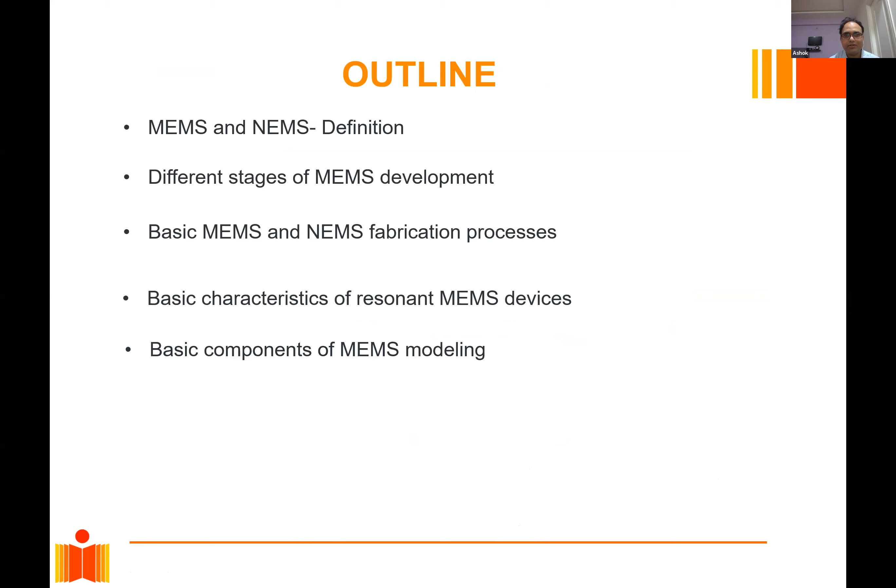Then how do we characterize these MEMS structures? What are the different components of MEMS modeling? And why is there a need for multi-physics and coupled field modeling in these particular devices? Then I will demonstrate some of these modelings through some test structures. So as you all know, MEMS stands for micro electromechanical system and NEMS stands for nano electromechanical system.

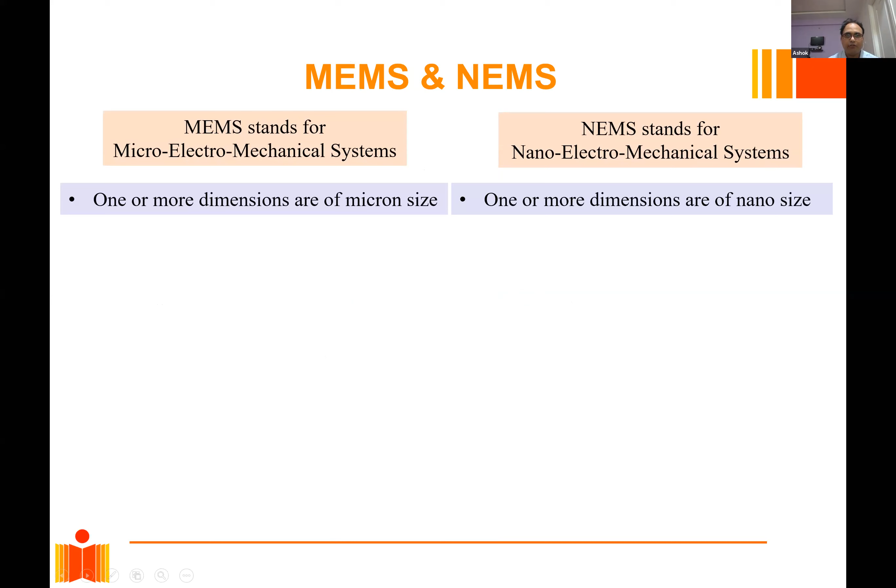And the definition is because one of its features is of micron or nano size. And in these structures, although there are different types of mechanisms to actuate them, if you're using electro, then we call it a micro or nano electro. And when you actuate these structures, the mechanical component of this device gets into motion, and that's why we combine it as a microelectromechanical system, which is fabricated on a single wafer.

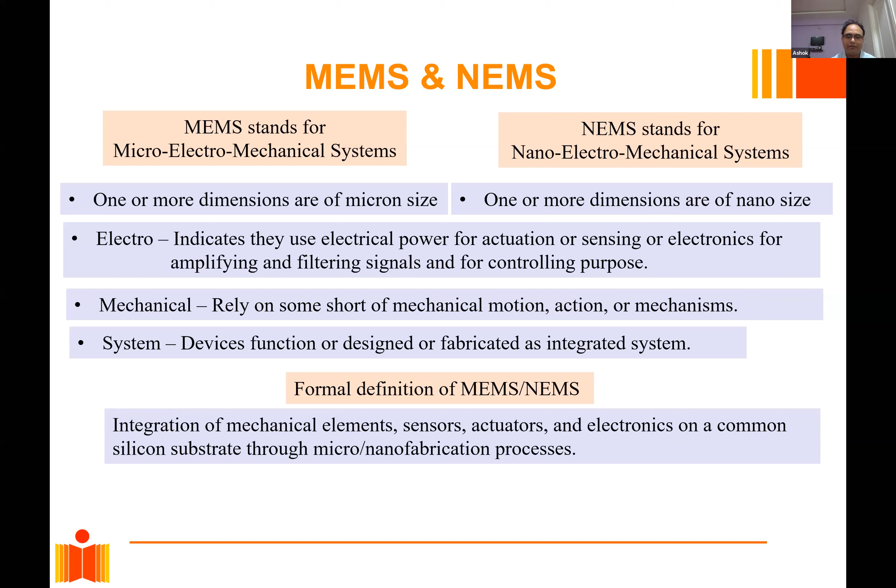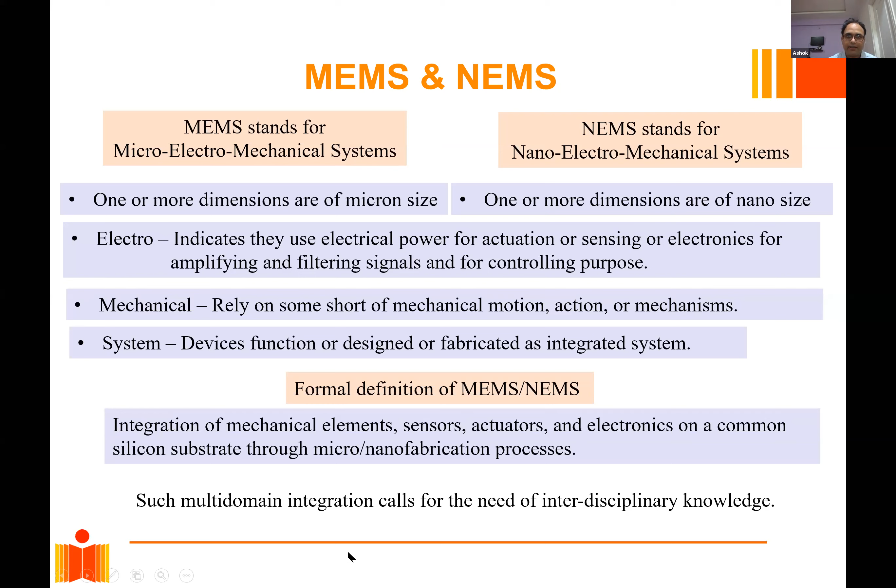So in a formal definition, we define it as integration of mechanical elements, sensors, actuators, and electronics on a common silicon substrate through micro or nano fabrication processes. And this calls for multi-domain analysis in dealing with the design of these particular devices.

So what are MEMS? Can we use them as sensors or actuators? Yes, MEMS can be used as sensors. And what is a sensor? Sensors are developed to measure physical quantities, and actuators are developed to induce the effect. For example, there are actuators which will actuate the motion, and sensors will sense some of the changes

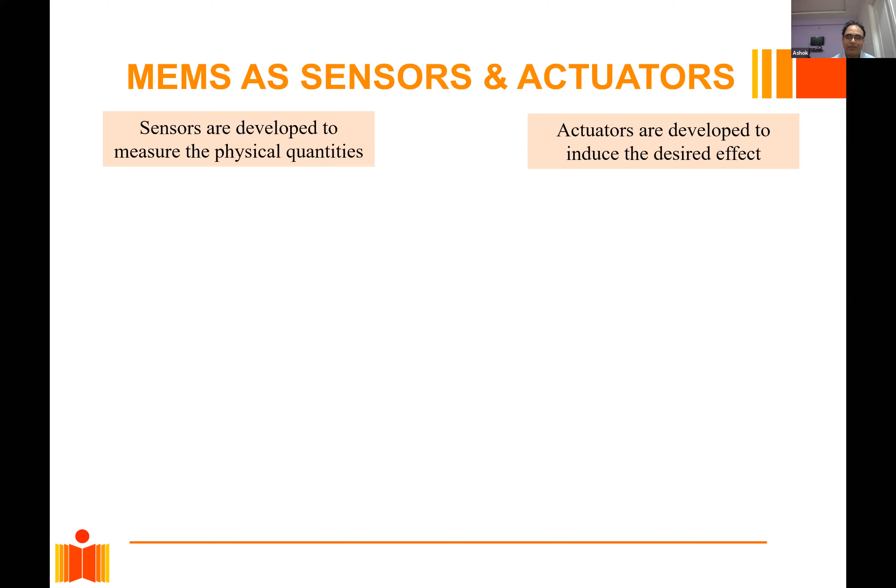which are happening outside. Okay, so when there is transfer of energy from mechanical to electrical, we call it a sensor. And when there is a transfer of energy from electrical to mechanical, we call it an actuator. So that is one way of defining the difference between sensors and actuators. And this is how you can make use of MEMS for both things.

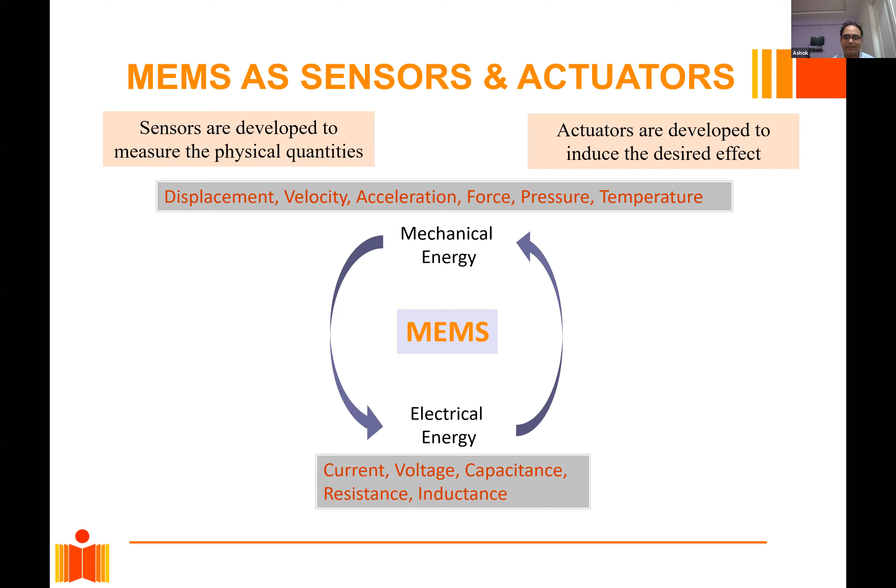So what are those mechanical energies? In what form may they exist? They may exist in the form of displacement, velocity, acceleration, force, pressure, and temperature. So these are the mechanical parameters that you can have. And change in any of these quantities will bring change in terms of the measuring quantity, which are current, voltage, capacitance, resistance, inductance, etc.

What are the examples? Examples may be inertial sensors, accelerometers, gyroscopes, pressure sensors, gas mass sensors, temperature, humidity sensors, force sensors. Similarly, we have actuators, for example, micromirrors. Projectors which we use for presentations consist of many micromirrors. And then we talk about RF switches, micro relays, thermal bimorphs, comb drives. These are all actuators.

And similarly, there is a characterization facility: electrical, mechanical, material characterization. So you require all these to first fabricate it and then do the measurement to see whether your design really works properly or not.

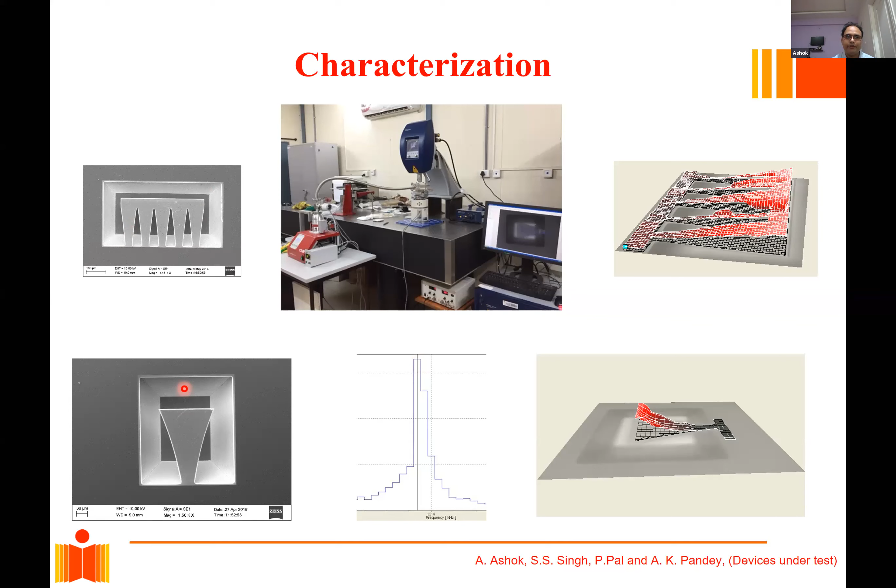So when we look at some of the commercial MEMS products, the first thing that comes into our mind is MEMS accelerometers, right? Because you will see that in almost all the cars we are using airbags, and the airbag uses these MEMS accelerometers, mainly by Analog Devices. And this was the first device that came into the market initially, and after that there were many devices that started coming with the progress and standardization of the fabrication steps.

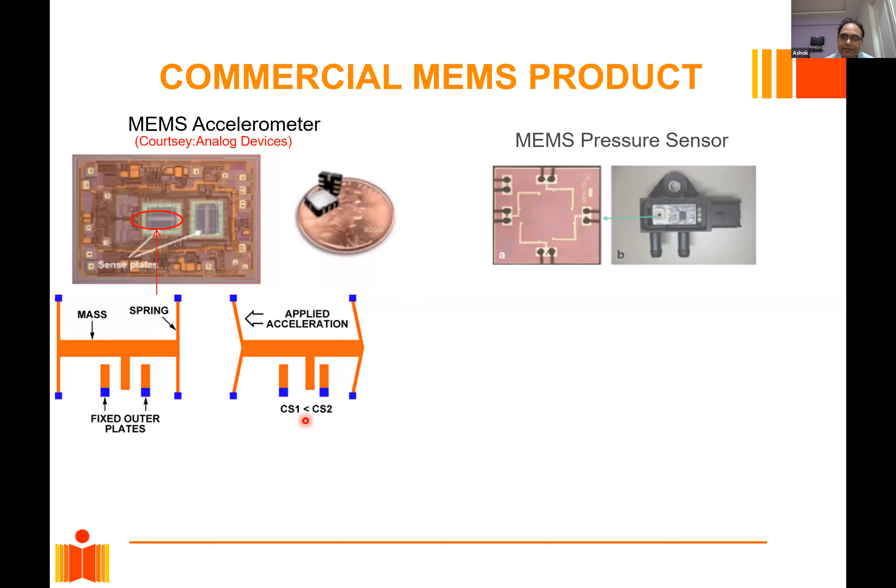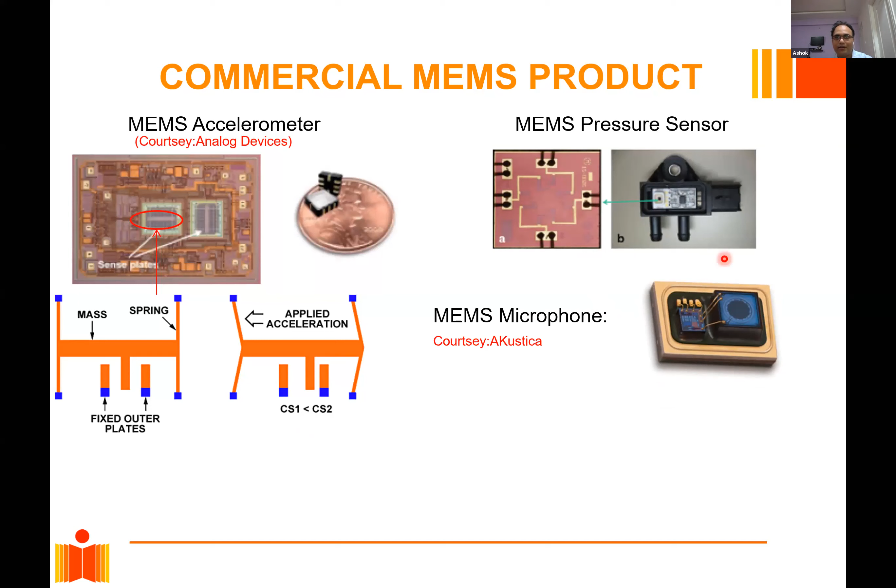And similarly, you can see there are many MEMS pressure sensors. And again, I would like to bring your focus over here: this is the only region where your MEMS device is located. The rest of them are all electronic signal conditioning circuits. And then the MEMS microphone is another very widely used example. And MEMS gyroscopes are used even more, starting from toys to our phones to different cameras in laptops. So you will see that MEMS gyroscopes are really very, very important.

Now, what are the different types of MEMS gyroscopes, and why? You will see that toys, cameras, and all may require some medium-range gyroscopes. Meaning they may be okay if they are able to measure angular motion with a certain error. But when you are trying to measure precision angular motion or rotation, you require different types of gyroscopes.

So here you will see this is your conventional MEMS gyroscope, which has combs and proof masses. And there are two proof masses here. You can see this is one, this is another. And when they move in plane, they may move in phase, and they may also move out of phase. One is called the drive direction, another one is called the sense direction. And when there is a rotation provided along this axis, you will see that when it moves up, that will give you a sense output. Okay, so this is one type of gyroscope.

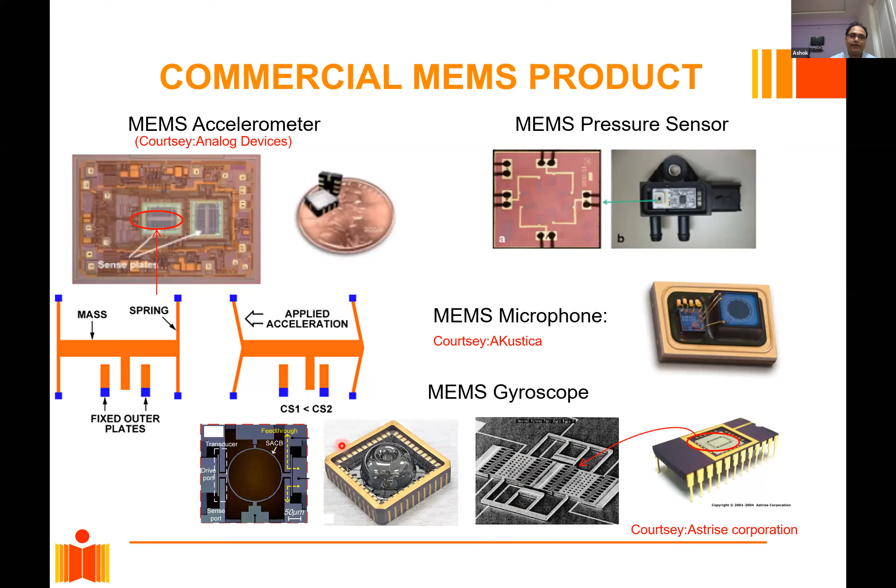And other kinds are shell gyroscopes and disk gyroscopes, which people are exploring to improve the characteristics of these gyroscopes. Now, when you look at one of these devices which are completely integrated, you will see that, as I said, nowadays people are trying to put a lot of these sensors on a single platform. So here you can see this is the accelerometer, this is the gyroscope, magnetometer, barometer, your connectors, and all of them are on a single platform, right? And this is the advantage. That's why we have been investing a lot of time for a couple of decades just to get sensitive sensors with reduced size, so that we can put many of them on a single platform.

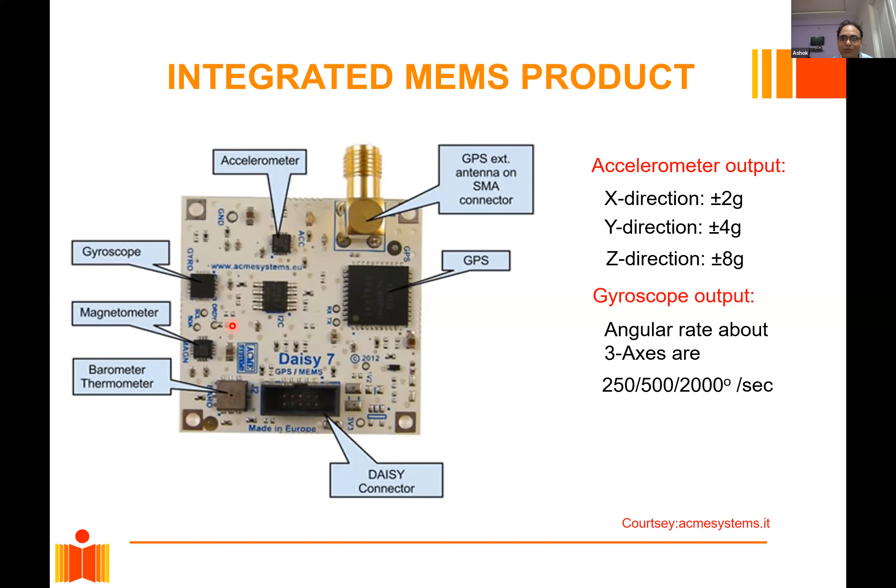So these are the specifications that I don't need to really go into. Now, if you try to see the biggest application, of course the application is there in aerospace, in many of them, but the biggest application that we can find is in vehicles, which is accepted by everybody. So in this case, you can have application in terms of airbags, which I told you use accelerometers.

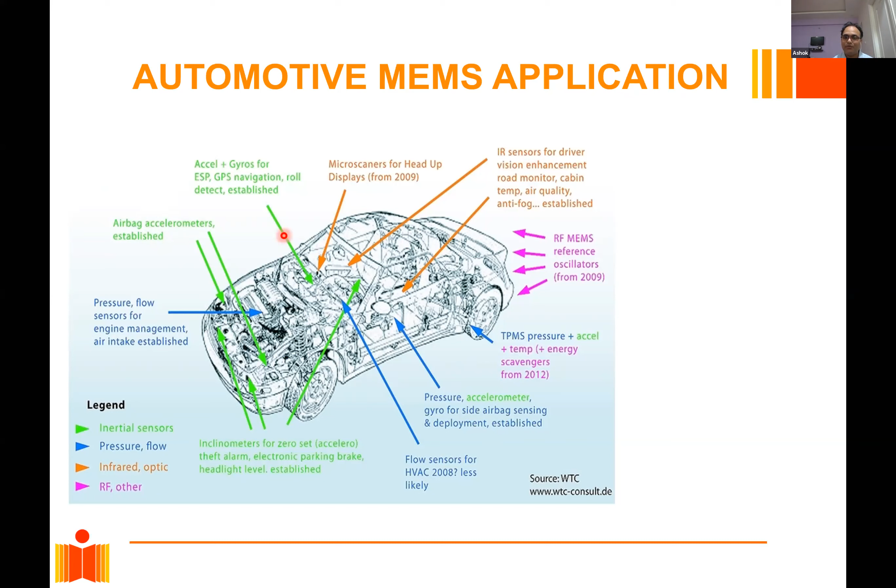You can have pressure flow sensors, inertial sensors, micro scanners, IR sensors, RF switches, temperature and pressure sensors in the tire. So there are many of them which can be used, and BMW 740i has already used 70 such MEMS sensors in their cars, starting from anti-locking braking, active suspension, appliance, navigation, vibration, fuel sensors, noise reduction. So these are some of the applications that you see.

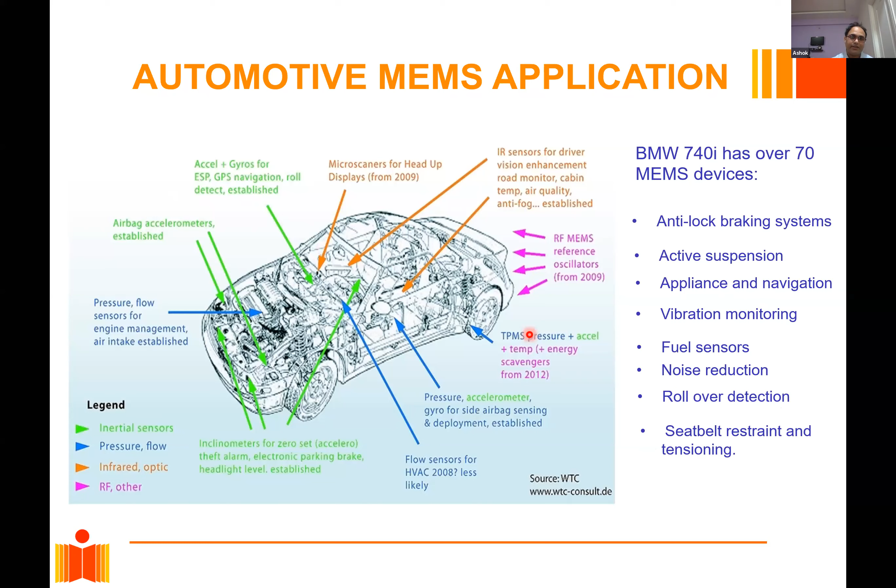Now going a little bit more inside these applications, you will see that in automobiles you can have sensors associated with dealing with the harsh environment, then steering, then safety. Most of these are divided into 4 different parts. One is safety and convenience, so you have to find sensors associated with safety and convenience. Then the sensors required for controlling the powertrain of your automobile, then body electronics, and also you will have to improve the sensor design related with driver information.

Sometimes you will see that most accidents happen when the driver falls asleep, or he is unconscious in some cases. So there should be some kind of alarm with the help of these sensors which can prevent accidents of that nature. So this is how people have started classifying and trying to figure out which kind of sensors can be used for improving the different mechanisms under these classifications.

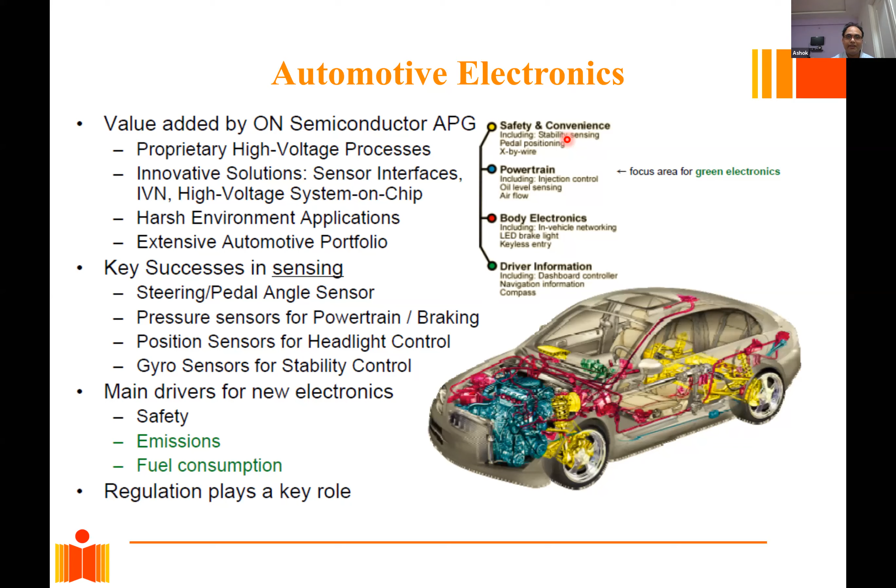And if you see, a typical electronics unit is the unit which will handle all the sensors in, let us say, your automobile. There are circuits which deal with different sensors related with your drivers, then analog circuits. So it has to really work so much, it has to process the signal so fast. Now what is the point? We are trying to increase the number of sensors, but we are using the same kind of electronic circuit. So is there a way we can improve the processing of these electronic circuits also?

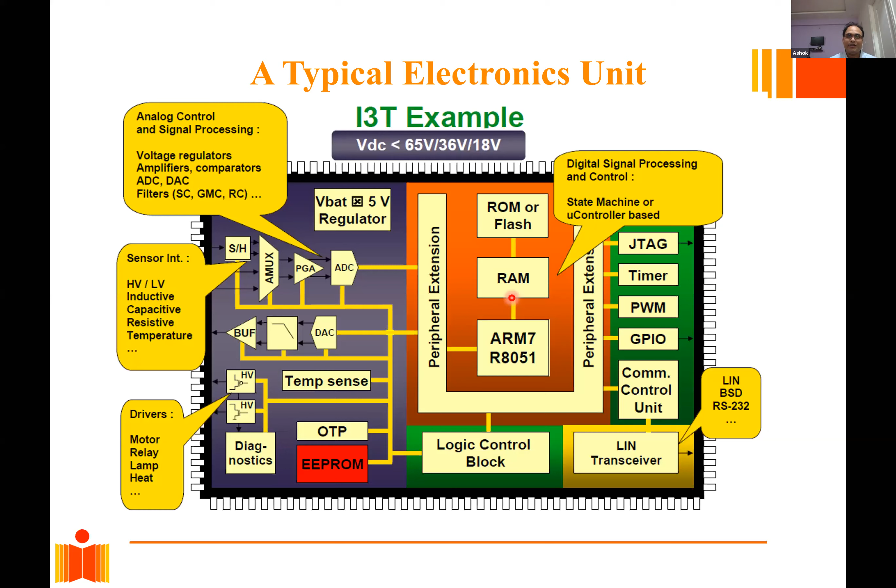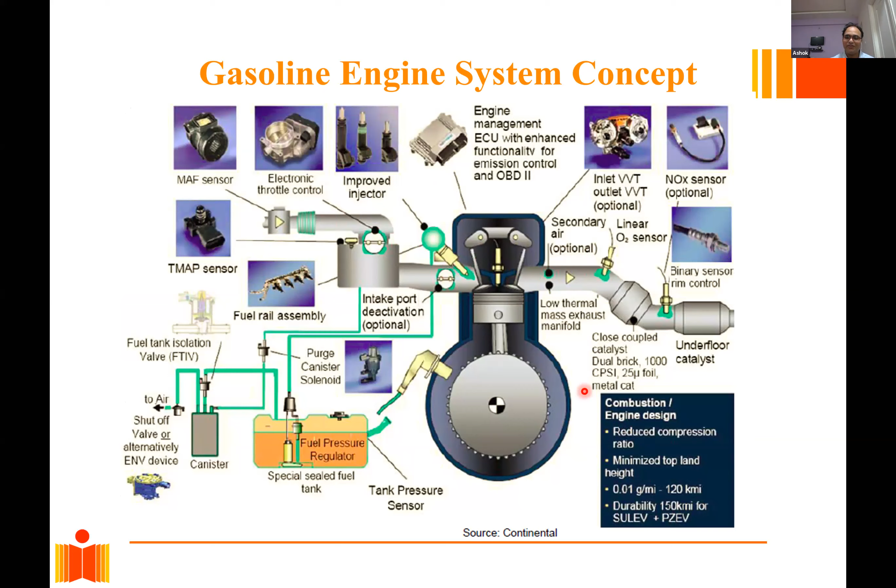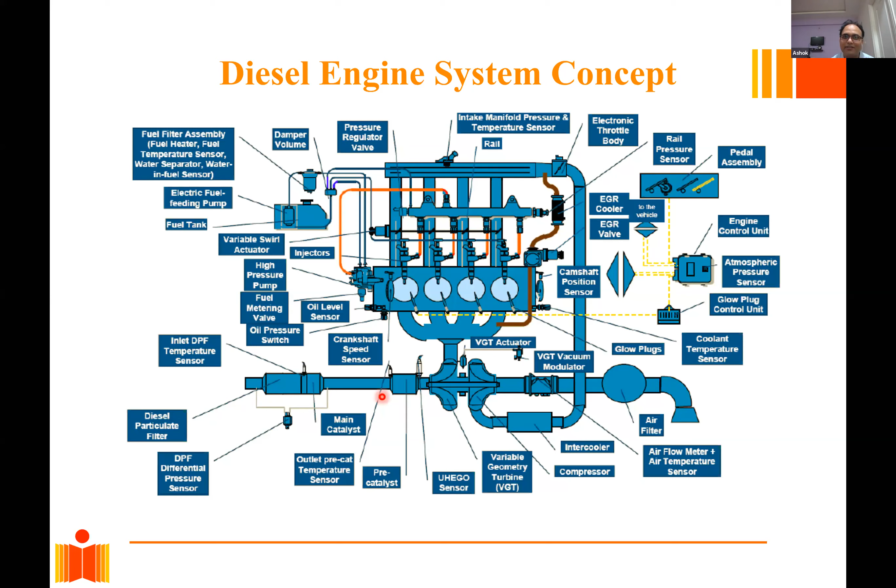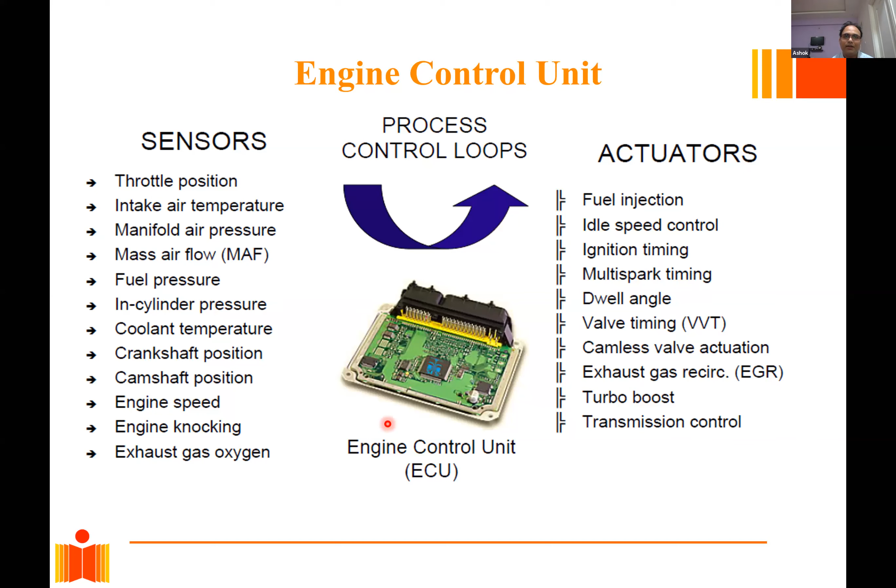So the question is, for example, for the engine control unit, the electronics which controls this engine, sensors can be throttle positioning, intake air, manifold, mass, fuel, in-cylinder, and all that. Similarly, actuators can be associated with all these activities. This response circuit needs to really control, and if there is a time delay related with processing the signals of the sensors or actuators, there will always be some kind of error, some kind of performance loss. So what is required? These are the things with the conventional automobile.

But since we are talking about smart cars, autonomous cars, it means you have to again increase the number of sensors, right? When you talk about smart cars or autonomous cars, you need to really talk about many things around it. Now, how are you going to measure it? You're going to use a camera, a laser, other different types of sensors, and it has to be processed so fast, because if you are driving at a high speed, everything needs to be in that order.

So here the question is, it's not about sensor design. Here the question is also about the processing of those signals which are coming from different sensors, and it should decide accurately what needs to be done. Otherwise the whole concept of smart cars or autonomous cars will really fail. And that's why you see there are a lot of tests going on. Even if many companies have developed these autonomous cars, they are not really going to take them out on the road, because of these problems.

So here, for this you need to care about safety concerns, powertrains, body electronics, driver information. These are the things that I was talking about. So it means there are too many sensors and actuators, too many signals, video signals, optical signals, radar signals, and different sensors and actuators. So how to handle so much data at a fast rate? So either you should design low-powered and fast sensors and actuators, or you design different electronics based on the fast mechanism.

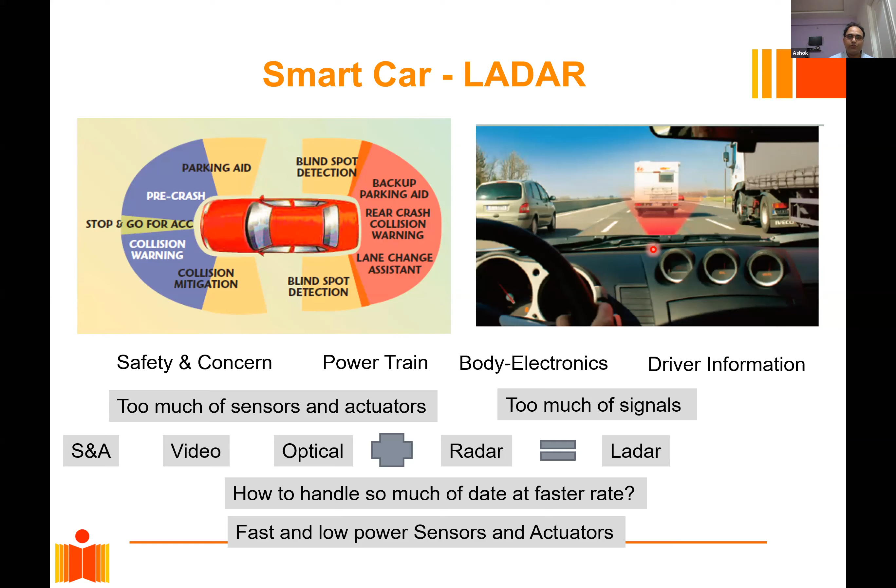Now coming to another very interesting application, called flexible electronics and MEMS integration. Until now we saw the size of MEMS structures is quite small, so they are fabricated on silicon wafers, right? But how to make use of them for a larger structure? So people started making use of flexible electronics. The examples are like, you can use it in smart clothing, lightweight military devices, integrated health monitors, bendable solar materials and all that.

So this is a field that cannot be made small, but must be big in order to interact with big things. For example, let us say you want condition and structural health monitoring of your car body while you are driving. How will you come to know that some portion is getting more stress and is about to break? If you have these kinds of sensors, you can simply put them on the surface of your car body, and they can tell you immediately many pieces of information, not just one.

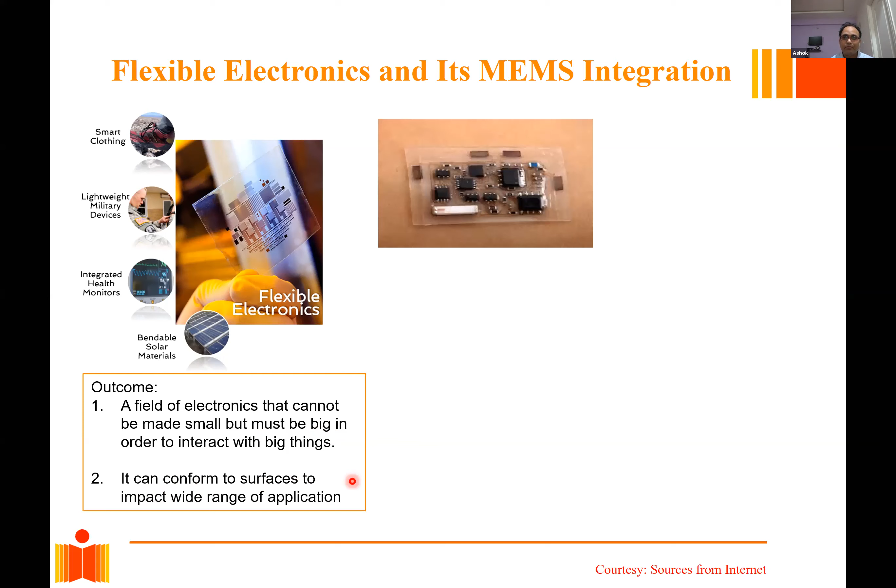So the advantage is that it can also conform to surfaces, so that it can impact a wide range of applications. And this is a typical device that you can see. The advantage is that you can bend it in whatever orders, and it can still work. There has been a lot of work done, and people have started using it.

Another application: you can monitor your health with these flexible electronic devices. You have sensors, temperature sensors, let us say. You can measure your blood pressure and all. Many things you can measure. Similarly, you can wear it as a watch. You can put it on your eye. You can have temperature monitoring. So these are some interesting applications. Here you can see these devices are very small, and they are on a flexible platform, so that you can use them properly.

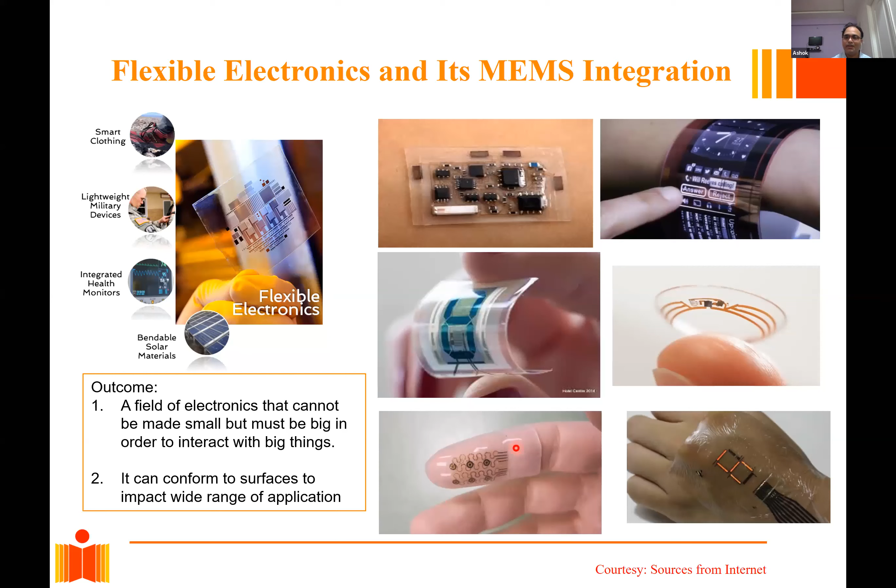Infrared, here we are talking about optical fiber related communication or the devices which fall under this region. And in terahertz, as I said, there had been moderate progress in sources and detectors, and functional devices such as this do not exist. So if the devices don't exist, you can't really make use of this particular region for the application.

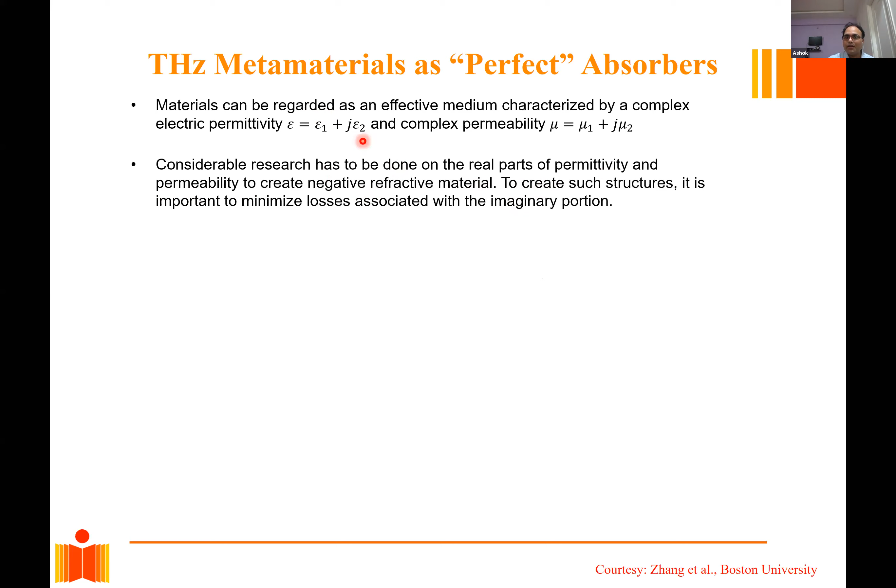But in metamaterials you can attain the desired permittivity and permeability. This is the advantage of working with these kinds of materials. So there has been a lot of research in understanding the real parts of permittivity or permeability. What needs to be done is we need to understand the imaginary component, which is associated with the losses. Sometimes losses are good, sometimes losses are bad. For many applications such as a perfect absorber, you will want to maximize the losses.

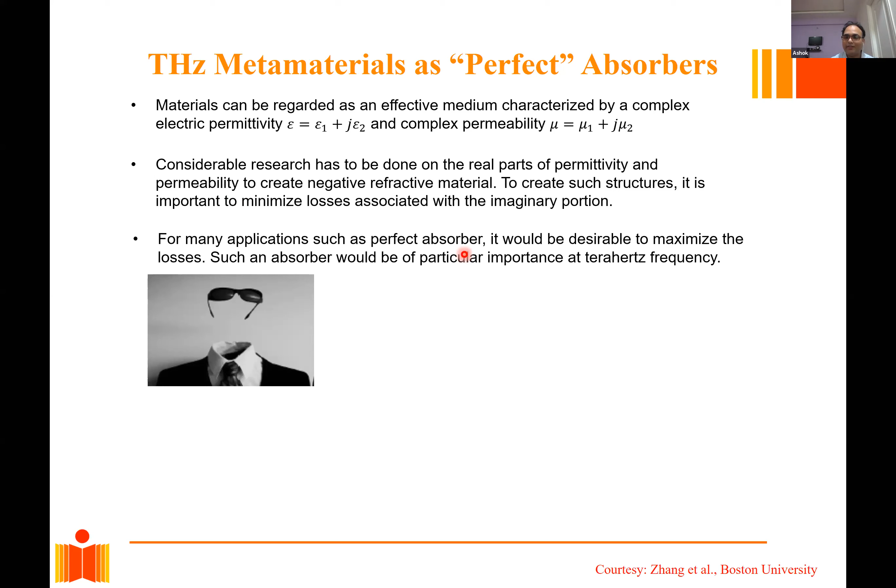So why do you need those kinds of material? You need them so that you can do yourself like this, right? You can put this material on your face and you will become Mr. India. And similarly, you can put it on your body and you will become bodiless. All the range of different metamaterial structures that you can have.

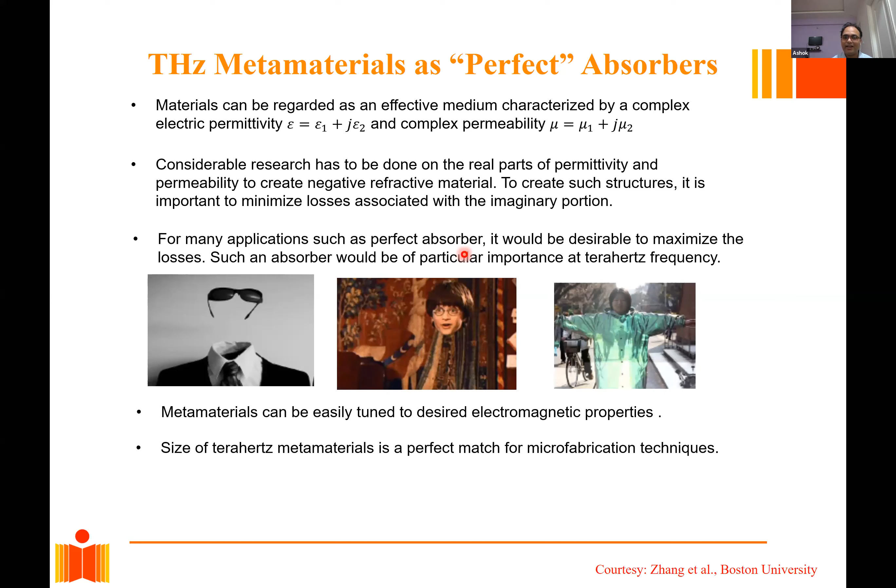So metamaterials can be easily tuned to desired electromagnetic properties. And as I said, the size of terahertz metamaterials is a perfect match for microfabrication techniques.

So here, if you just look at the metamaterials, they are sub-wavelength structures in array form. So the question is how it looks like. What do you mean by tuning the properties of these metamaterials? Is it one or is it an array? So basically metamaterials exist in array form.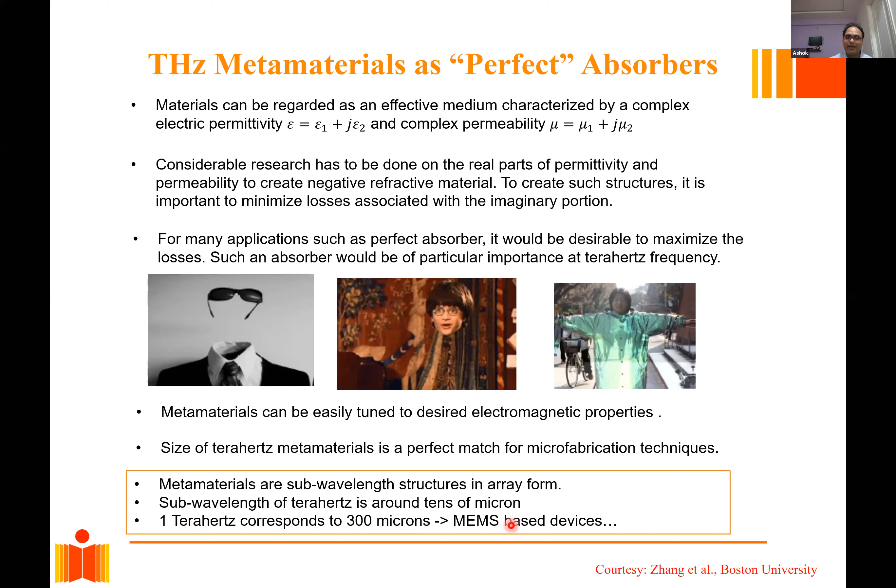Now the question is, what is the size of one of these materials? So that will decide the size of the wavelength. Okay, so 1 terahertz corresponds to 300 microns, and MEMS devices can be fabricated of that particular size. So one example of a terahertz metamaterial you can see like this. So this is one substructure, and when you use many of them, it becomes an array of these structures, and together it gives you the property of a single metamaterial.

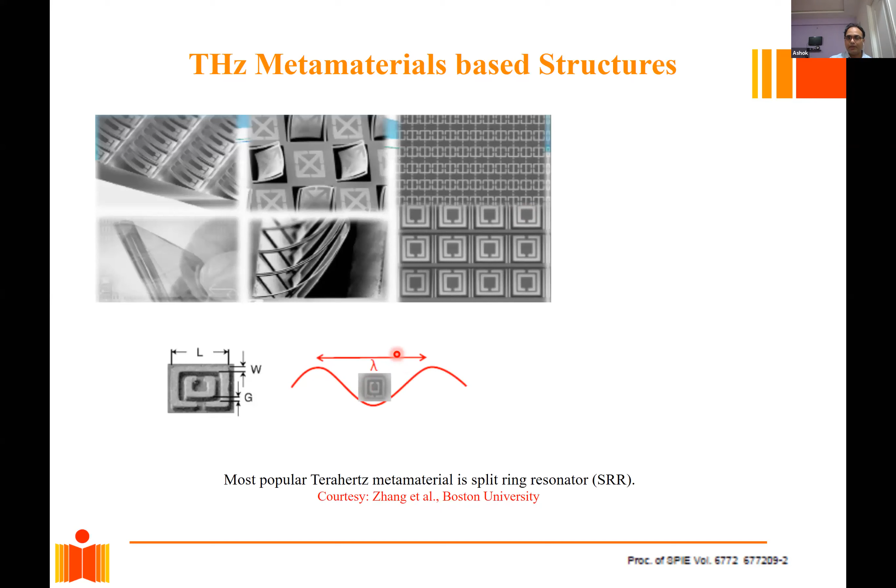Okay, and what it does, it helps. And what is the size of this? So here you can just see the size, right? The size will be within the wavelength of terahertz. So what it does, it can control the transmission and reflection of light by tuning the electric and magnetic properties of these structures. Okay, so this is the biggest advantage of such kind of metamaterials, MEMS devices.

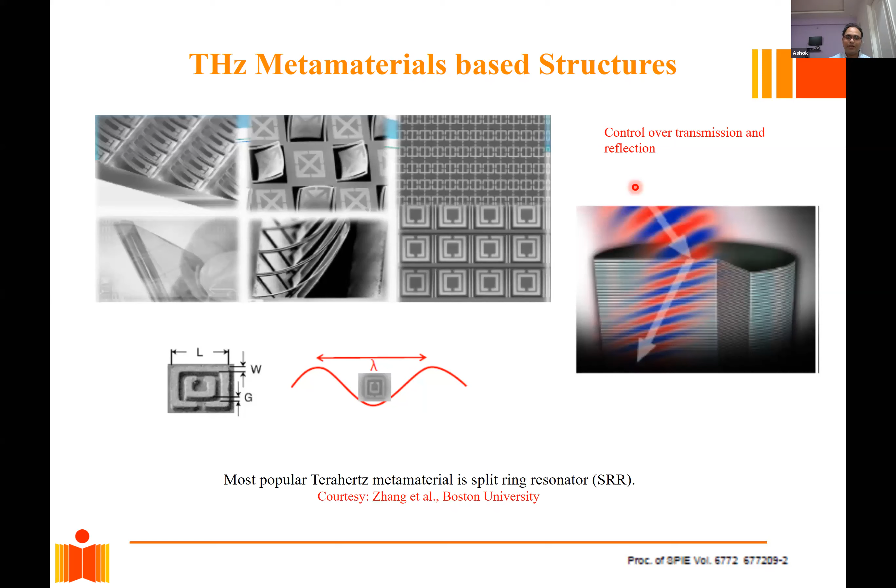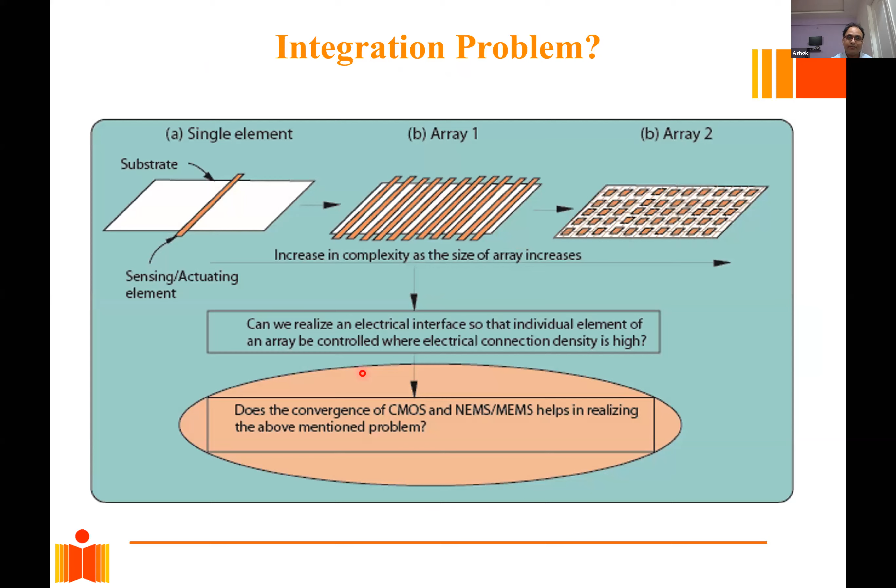Okay, now when you deal with arrays of these structures, this is another big example. So you have one single element, you have an array of elements, you can have many of them together. Now, because all these devices have to be bonded on a substrate, right? Or one die. So to interface these devices with electronics, there are different types of integration mechanisms.

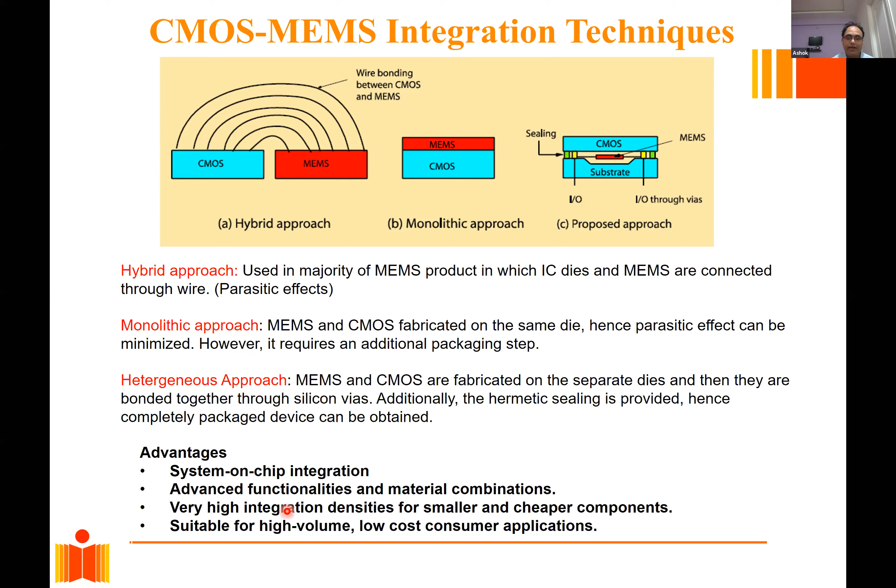Passive means static, okay? But here the device has to move, so it has to be hanging between the electronics and the substrate, right? Because the device is hanging on its substrate, when it is combined with the electronics, one can have some kind of via through it, and then you can seal it to create the required vacuum in the chamber. And vacuum is another important thing, because gases can induce damping of your structure, and when we deal with the performance of these devices, damping plays a major role. Okay, so hybrid type, monolithic type, heterogeneous type, and advantages like system on chip integration, and these are many of the advantages that you come across.

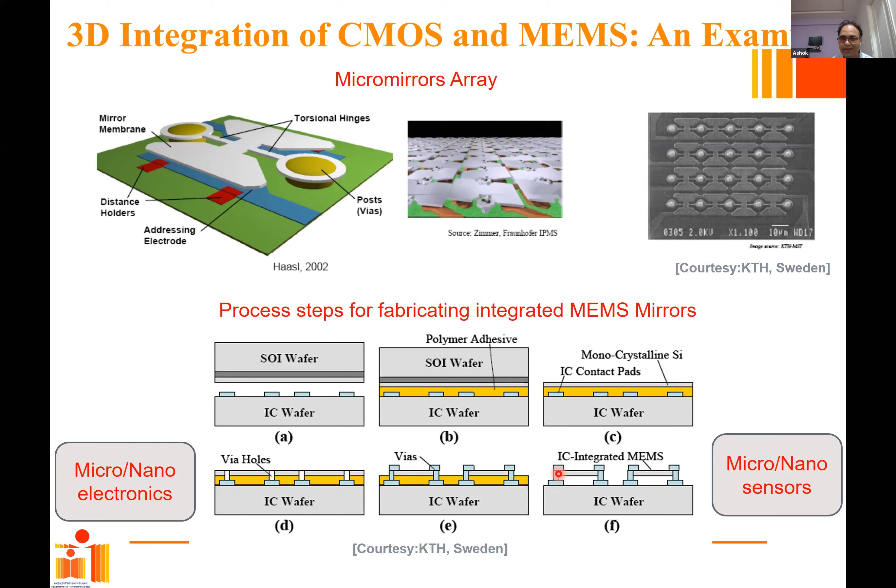So why are we going into these small details? Because we want to measure the lowest signals through these devices, and these lowest signals will come only from these viruses or noise and all that.

Okay, and another thing is you can go to the quantum regime only when you can suppress the noise. So when you go into these devices, it is really required that we should be able to design these kinds of sensitive electronics or transistors or sensors.

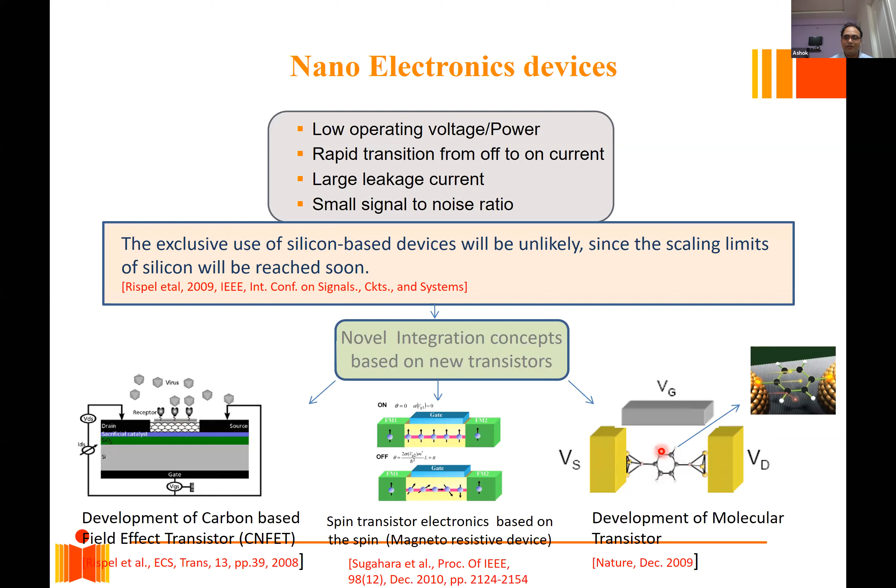Another such example is the biomolecules. That's why between these two, source and drain, this is called the molecular transistors. So you will see that there are a lot of devices. People are coming up with different types of transistors, MEMS-based transistors, and finally, these optomechanical cavity-based devices.

So, of course, to increase the signal rating, right? As I was talking about, when you have so many sensors, you need to also improve the logic gates, right? You have to improve your electrical processing. For that, unless you improve these electronic devices, you can't really do it. So that's why people started talking about the optomechanical cavity, with laser light.

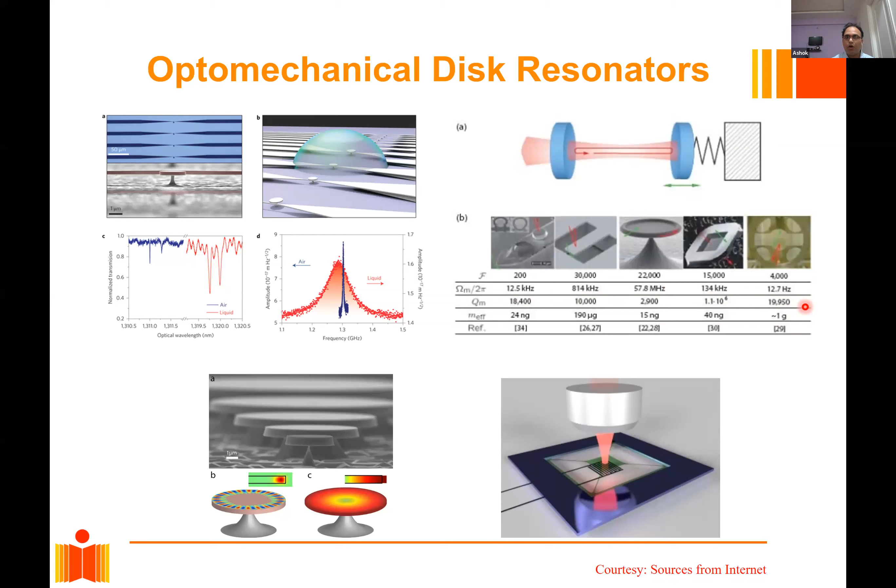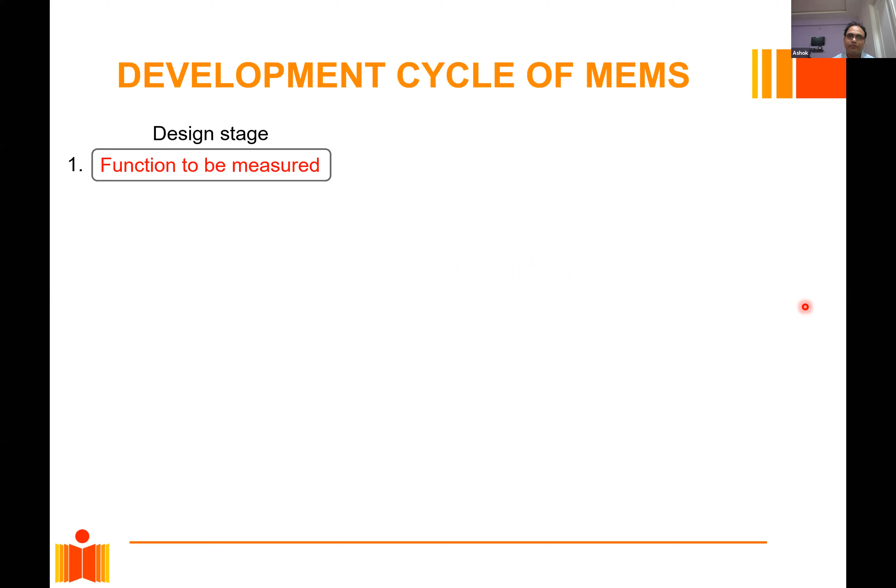So we discussed so many applications here, but how do we understand their design through the fundamentals? Until now we were just talking about the applications, different sensors. Now let us go into the more fundamental approach. When you have to develop a MEMS, what is really required? You first have to think about what function you want to measure, whether temperature sensors, pressure sensors, or inertial sensors, and related to that change, you will have to find out what dimensions need to be taken.

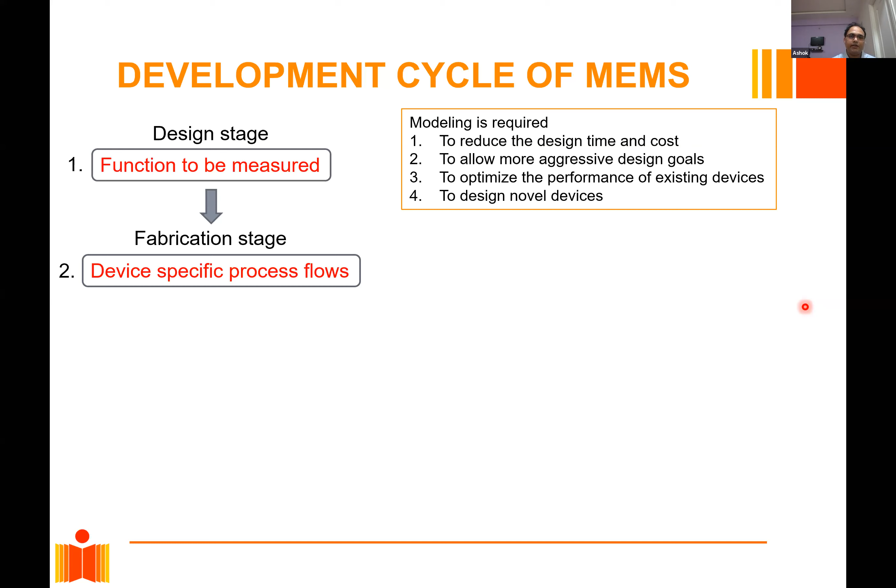After you are done with your design stage, you go into the fabrication stage. Depending on whether you are going for thick micro devices or thin micro devices, you choose your fabrication type. There are different types of fabrication. I have mentioned a few of them here.

Surface micromachining: if you want to make a thin and planar structure, you can use surface micromachining. Bulk micromachining can be used for somewhat thicker structures. In surface micromachining you have layer-by-layer deposition and etching, and in bulk you try to create a structure out of the given die by machining it.

And LIGA processes are used for developing even more thick structures like micro motors, right? Micro gears, which are quite thick. So you have to make use of some very specialized fabrication technique in that case.

After doing that, you have to do wafer level testing, of course, before going for the packaging. What it does, it ensures that your fabrication is standardized and the MEMS structures are released properly. But after the standardization is done, you don't really need to do this again and again. Usually it is not part of the commercialized cycle.

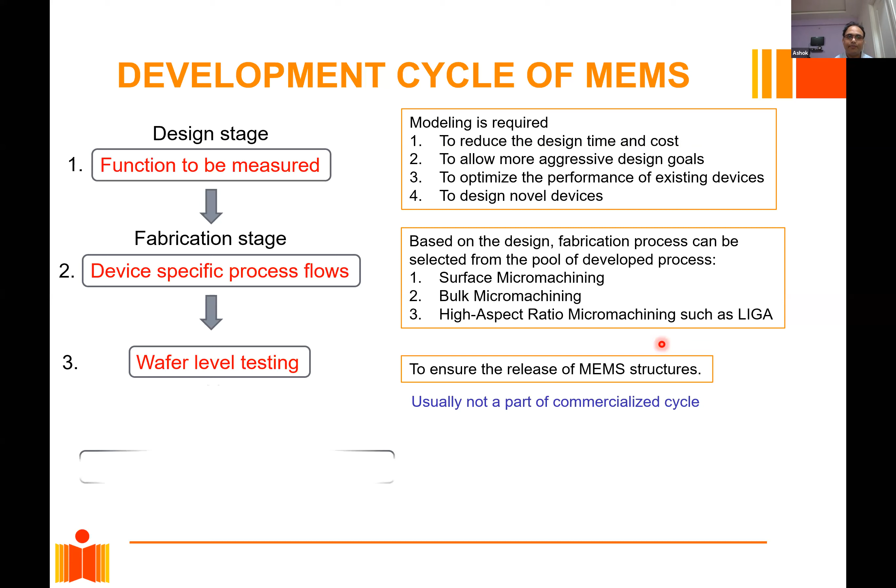Then you go for packaging, development of custom packaging. So for different devices, packaging has to be decided, because some of them will work at ambient pressure, some of them will work at vacuum, some of them will work at a very high temperature, low pressure and all that. So you really need to devise your packaging. This is another challenging part.

That's why we can't really make use of MEMS everywhere, because it fails. If it works for one application, it fails for another, because it may be compatible, its design may be reliable to that level, but the lack of reliable packaging makes the device fail. Okay, so this is another area where we need to really focus a lot. Then we do testing of some of the packaged devices to ensure that everything comes back.

And when we deal with CMOS MEMS integration, here we have the coupling of the fabrication and packaging, which go together. So this is another advantage why we also talk about CMOS and MEMS integration, and it has a very important role to play in the development of different types of packaged MEMS structures.

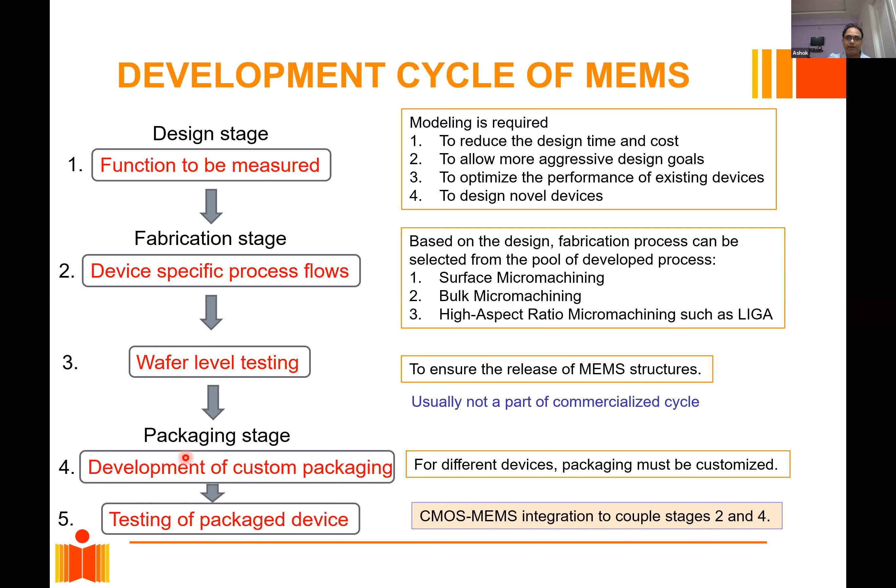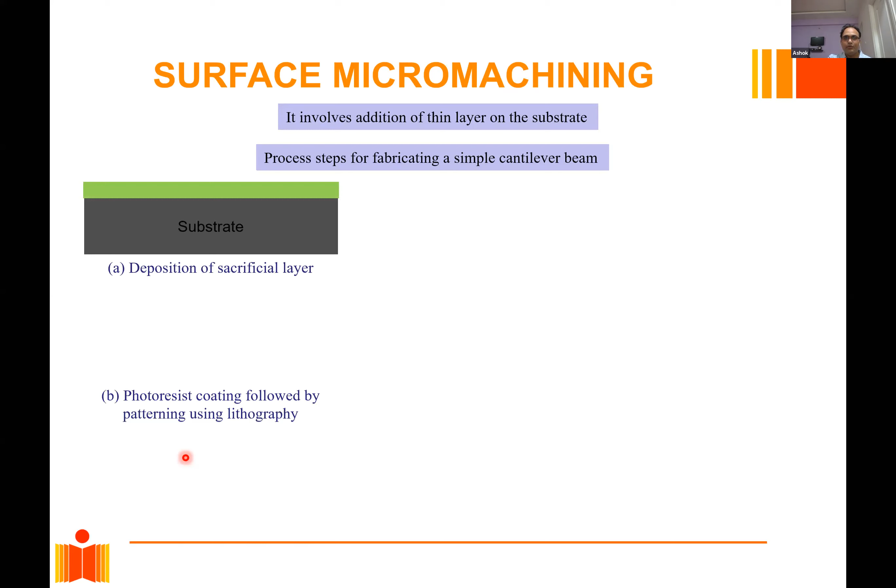All right, so just to give a very small overview of what is surface micromachining. It involves addition of thin layers on the substrate, and when you try to fabricate a simple structure, you start with a substrate, deposit some layer here, and then you do patterning, and after that you do etching. So here you can see your sacrificial layer is usually oxide or nitride, and then you do patterning. There are two different ways of doing patterning: either using e-beam lithography, or using photolithography. And after that you do etching.

And after this, you remove the photoresist that you have put, and then you put your metal. You do deposition of the metal through thermal evaporation, RF sputtering, electron beam deposition. There are different types of metal deposition instruments. And after that you remove this sacrificial layer. When you remove it, you can see that there will be a hanging microstructure, which is fixed to your substrate. And of course there will be some insulation over here, so that it doesn't short circuit when you apply signal between this and this. So that way you have created the complete structure.

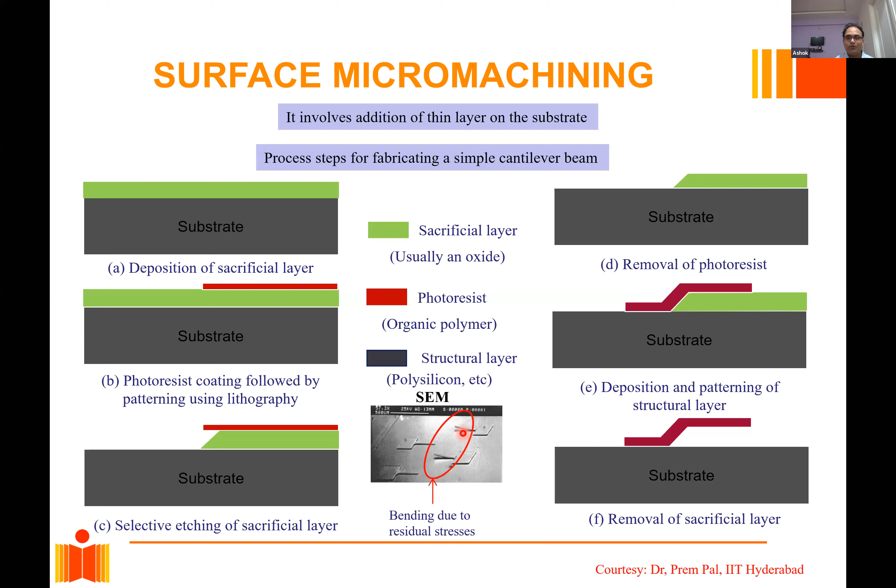Now when you are done with this step, you may get different types of structures. Here you can see some of the beams are straight, some of the beams are deflecting upward, right? So why is it coming? They come because of the residual stresses. Bending is due to residual stresses. So these are the things that we have to keep in mind.

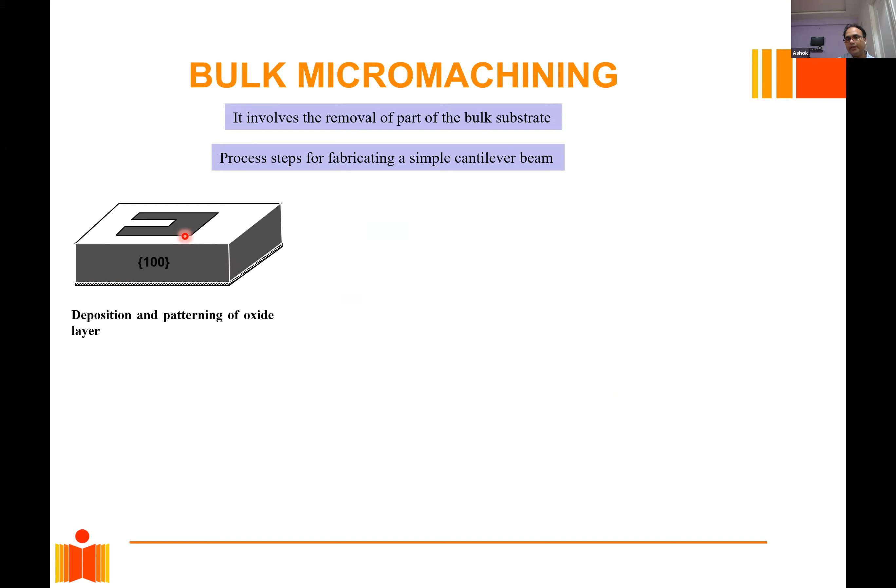Now what happens in bulk micromachining? It involves removal of part from the bulk. For example, let us say you have silicon oxide and you have transferred the pattern. Now etching will start from the bulk only; you are not depositing any layer. In this case you use KOH. When you use KOH, you can see that from here it is all etched, but there is a part under the beam which is left out. If you see it from the top, it will look like this.

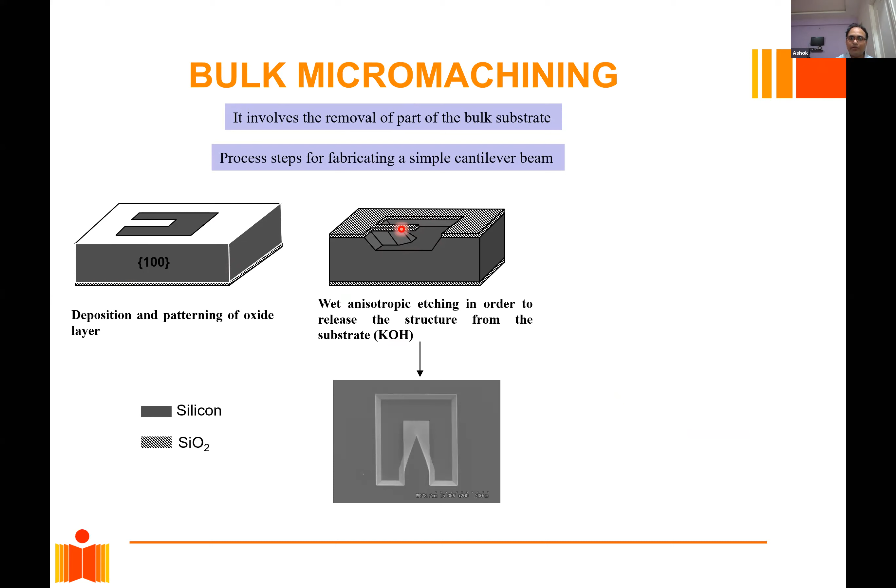Similarly, if you use this one with another etchant which is called TMAH, you can see that at least the material underneath is completely gone, although it has the slanting edge on the sideways. Okay, so that will look like this.

So in this particular case, if you just try to see the example of these two structures, you can see the importance of selecting the perfect or correct etchant; it is really required to get a good microstructure. Okay.

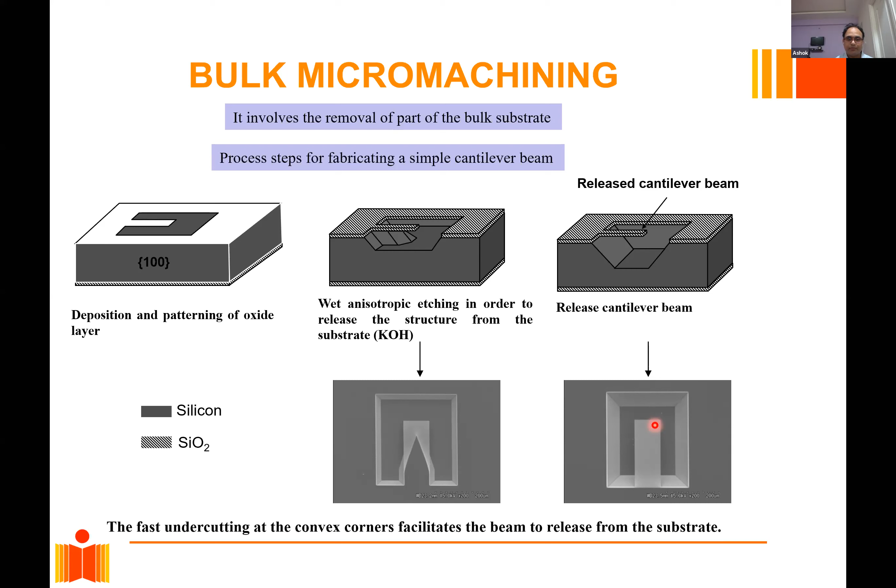Third one, wafer bonding. So in this case what you do, you take two die, you create a cavity over here, okay, and then bond them together. So when you do bonding, you get rid of the top structure, pattern it and create the structure. So you etch the top layer, then pattern it and then do etching.

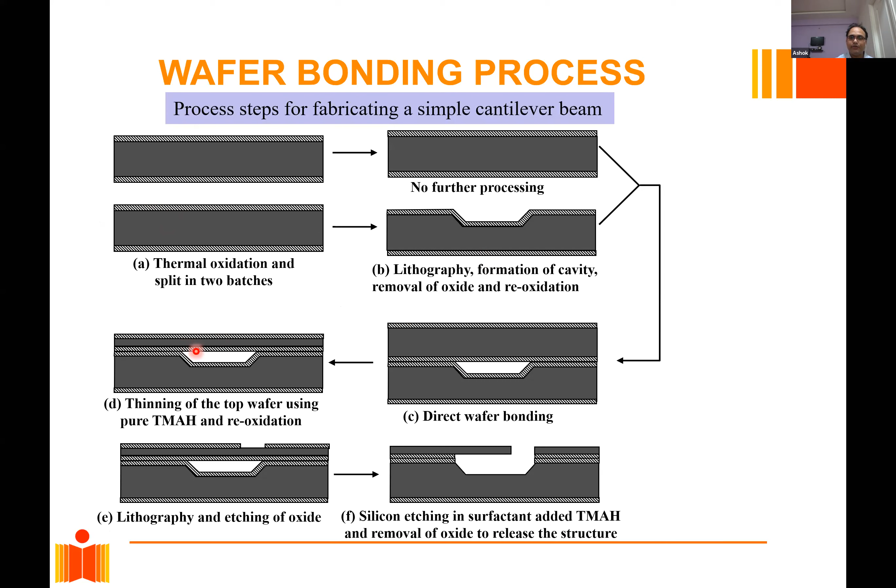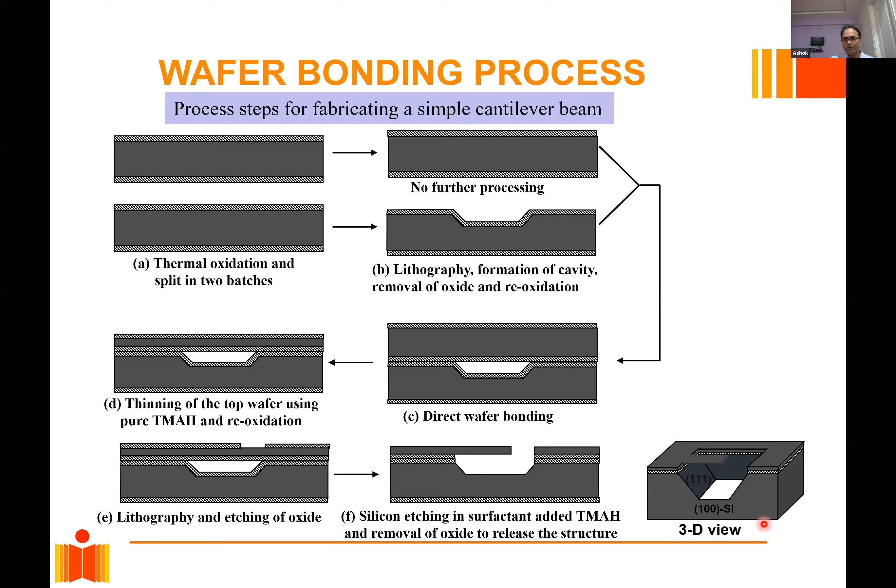So here when you do etching, what will happen? You will have a structure. So this can give you little thicker beams, which is of importance using this particular method.

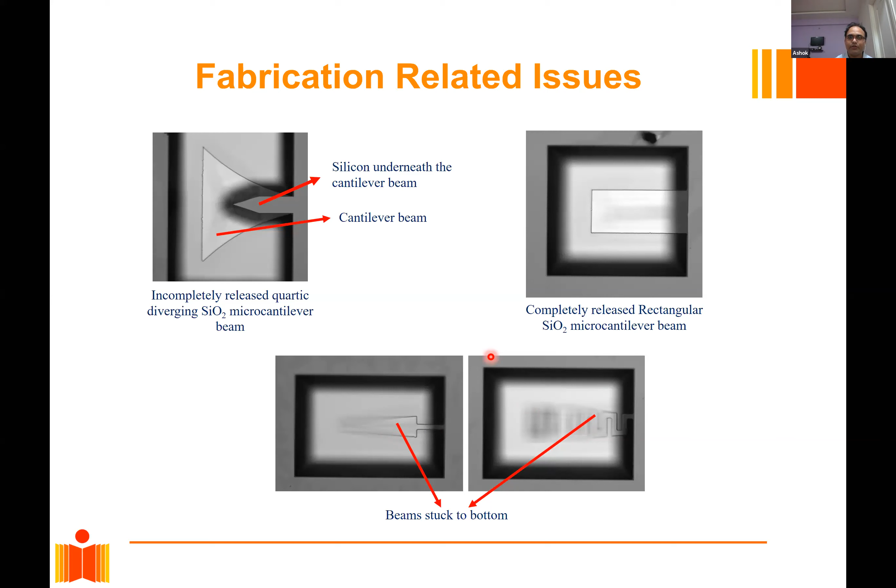So there are different ways you can help, but still if you don't follow the design rule, such kinds of things are regular results that you really get when you fabricate your structure without thinking about the design.

And yes, there are different software, different tools, for example IntelliSuite and CoventorWare. These two are major players who have modules related with the fabrication of these structures. So you don't really require so much of this equipment that I was showing you in the beginning. It requires crores of investments to really get it. So it's better if you are focusing on fabrication technique. So here, I will just play one video.

Oh, so it looks like I'm not able to play it.

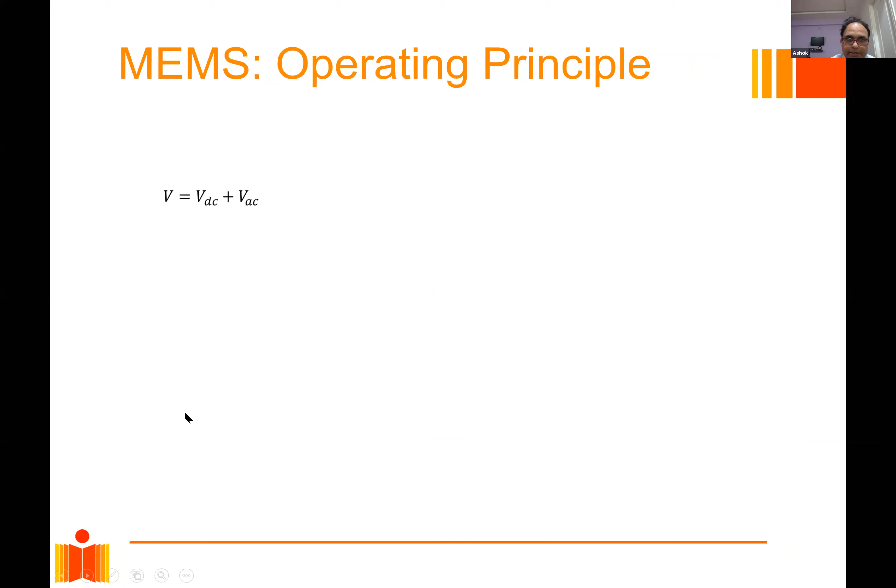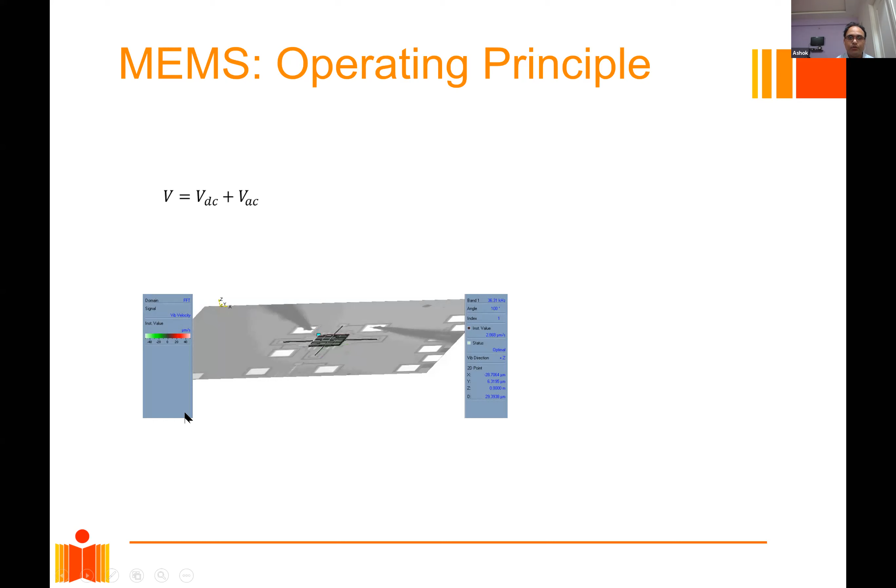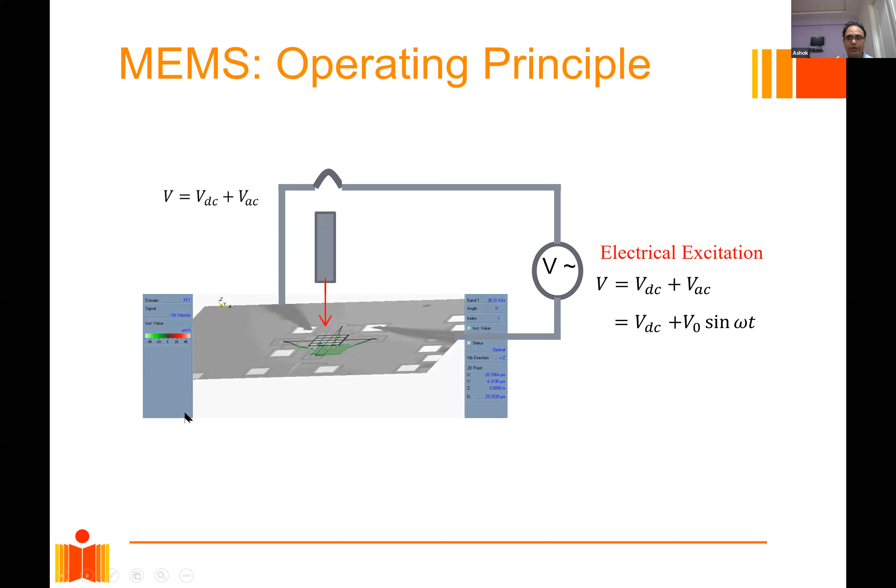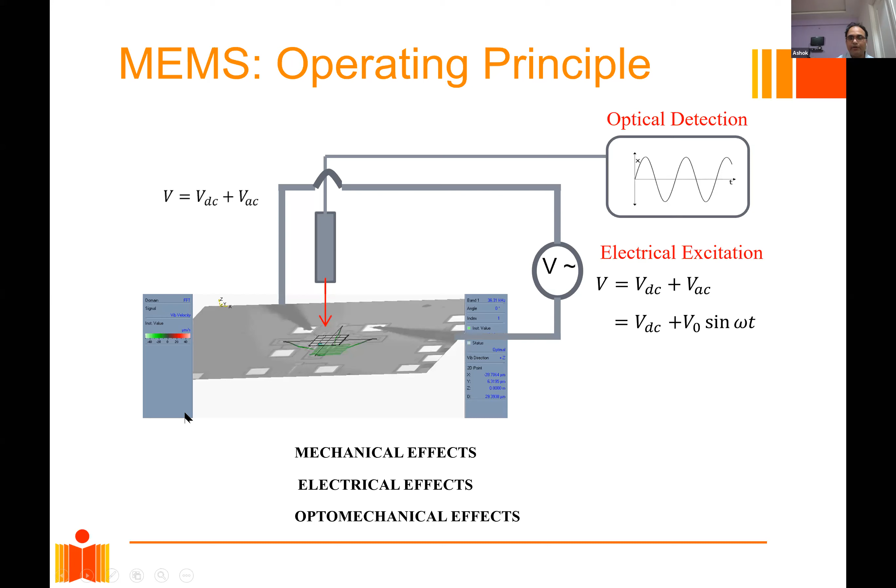Okay, so this is what I told, that you are exciting between these and this, and when you have to do the measurement, you put the laser light, and then because of the displacement of this particular structure, you will have a Doppler effect, and that Doppler effect will give you the change in the displacement through the displacement decoder, velocity decoder, and accelerometer decoder, which are there in the vibrometer. Okay, so from here, because of the vibration of these structures, you will get the vibration of structures, the mechanical effect, electrical effect, optomechanical effect, right?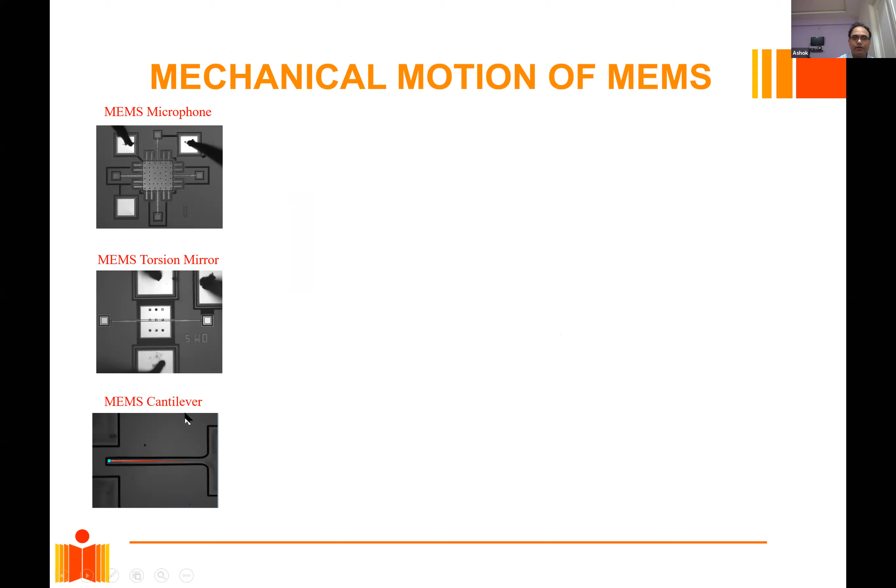So what is this mechanical related effect? What is the quantity which you are looking for as a sensor and actuator? So here these are some of the devices you can see. This is your MEMS microphone, this is MEMS torsion mirror, this is MEMS cantilever, and this is the vibrometer. Here you can see, if you excite, you will get a motion like this. Here if you excite, you will get torsional motion like this. Here if you excite, you get cantilever motion, right? So when you try to see the motion of these structures, all of them are oscillating at a resonance.

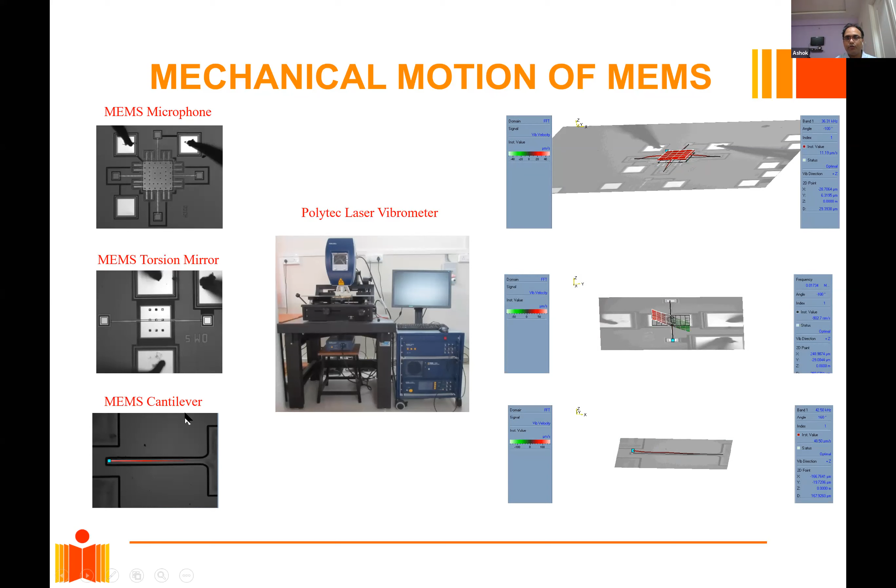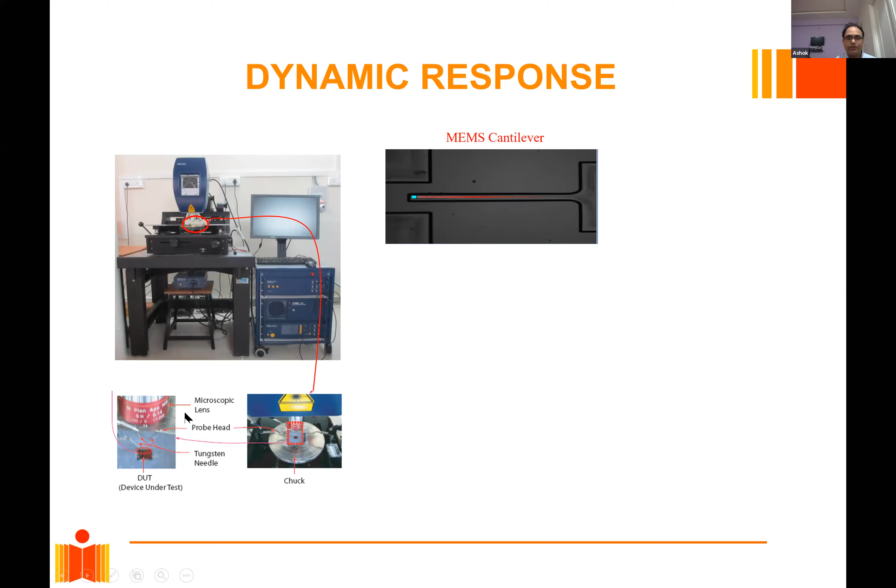Okay, so from these structures, we try to look at the resonance, and the resonance of these structures is captured using these FRFs, right? So if you see this peak, this will give you the first mode of motion. It means that in this cantilever, the fixed end will be 0, and the free end will move at the maximum amplitude in the first mode. But when you go to the second mode, the motion shape will be like this. Third mode will be like this.

So as you go into different frequencies, you have different types of displacement form, and all of them happen at different frequencies. So it means that when we try to design resonant sensors, we have to look at these peaks, where we want to really operate. So in this particular MEMS cantilever beam, the first frequency appears as 43 kilohertz, the second one appears as 245 kilohertz, and the third one appears as 690 kilohertz.

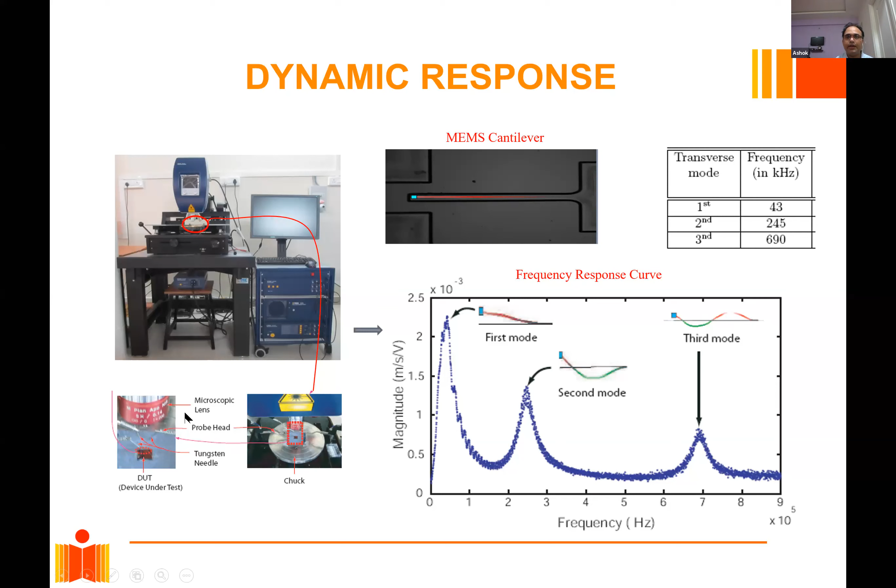So from these peaks, what are the design parameters you have to really look for? The first thing is the frequency, which is associated with under root K by M. K is the stiffness of this hanging structure, M is the mass of this hanging structure, and this is called damping ratio, which is C by Cc. Cc is critical damping, and damping is governed by how wide this peak is. The frequency related with the peak is called natural frequency, or resonance frequency in case of forced vibration, and damping ratio is associated with quality factor as 1 by 2 zeta, right?

So quality factor says how sharp your peak is. If Q is very high, damping is less, and the peak will be very sharp. Similarly, if Q is less, damping is more, and this will be wider. So MEMS based resonant devices completely depend on how you deal with this resonance peak, whether it is in the gigahertz, megahertz, or kilohertz range. If you want a wider peak, you have to put more damping. If you want a thinner peak, you need very small damping. So this is what we try to control as a designer, before we fabricate our device.

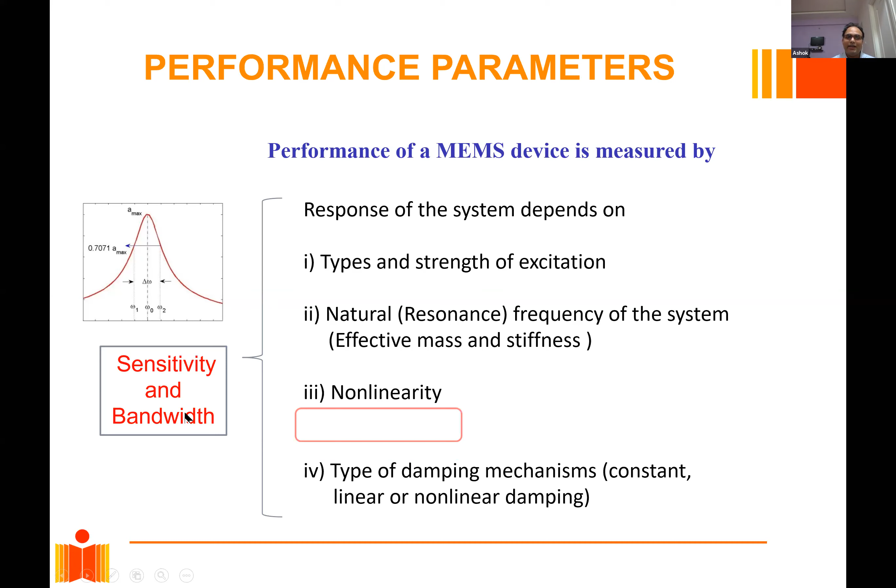But on the other hand, we also need to get the higher bandwidth. So bandwidth can be through this or by moving your peaks over a given range. So it means that performance of a MEMS device is measured by types and strength of excitation, frequency of the system, non-linearity in the system. We have not dealt with non-linearity yet, but since these are very small devices, the deflection may cross beyond the thickness of this device. When it is beyond the thickness, then the non-linearity may become evident. So we have to include those effects also. And then damping, of course, different types of damping which exist here.

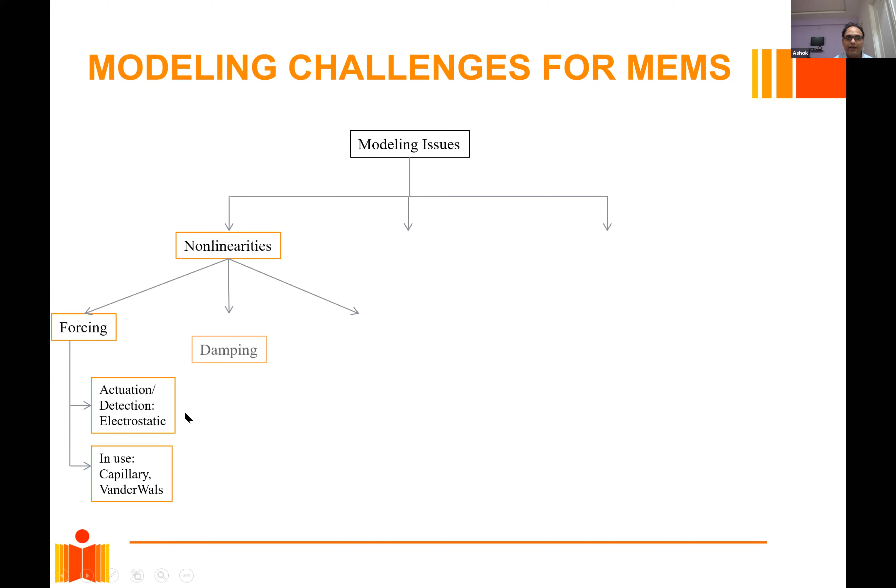So what are the modeling challenges for the MEMS devices that we really look for? The modeling challenges are non-linearities. There may be non-linearity associated with forcing, which is excitation in capillary forces. Sometimes when your device is coming closer to the substrate, there will be some fluid, so capillary force will be formed, and that will create another kind of opposite force. Then damping, non-linearity in damping, which is associated with your squeeze film and other.

Stiffness related, geometric non-linearity, like here you can see there is a large stretching. It means that it will simply go into the geometric non-linearity, right? Then material non-linearity, like the piezoelectric effect, shape memory alloys. Nowadays people are also trying to fabricate it out of SMA. And then coupled physics, you have to couple it with electrical and thermal related equations to get the effect. If you forget everything, what is really required is we have to focus on the resonance, whether it is sharp or wide; all other parameters that we are talking about, the effect is to control that resonance peak.

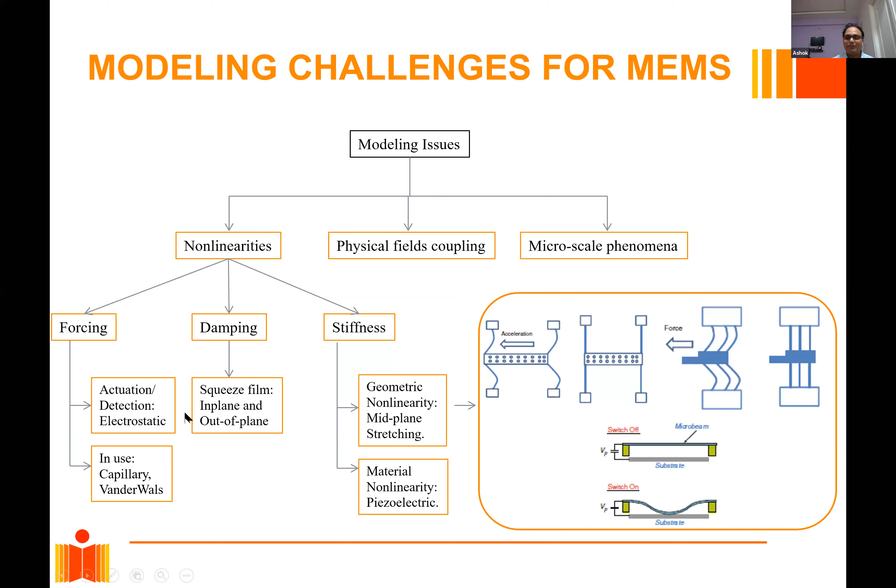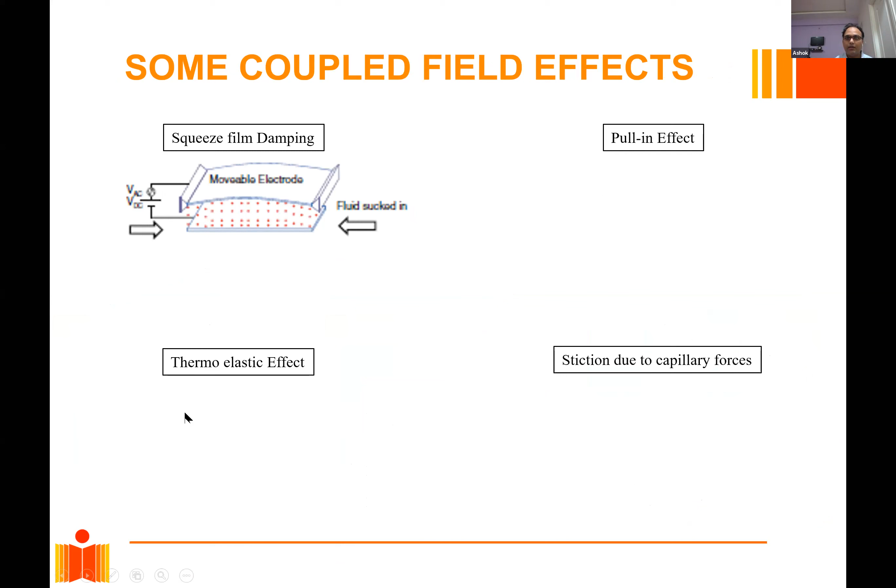So how do we solve it? For example, these are the coupled field effects which are evident in these MEMS devices. Like a squeeze film, here you have interaction between structure and fluid, right? Then you have thermoelastic effect. So when structure deforms, there is a temperature gradient formed, and then the energy equation also you have to solve along with the elasticity equation. Then pull-in effect, you have to solve electrical and mechanical related equations.

Stiction, this is what I was talking about. When it comes and there is a droplet, let us say, on the substrate, it will stick, right? And then you will have to solve the structure equation in the presence of capillary forces. So these are some of the coupled field effects that are quite common in MEMS devices, and you will need to really understand them to solve it.

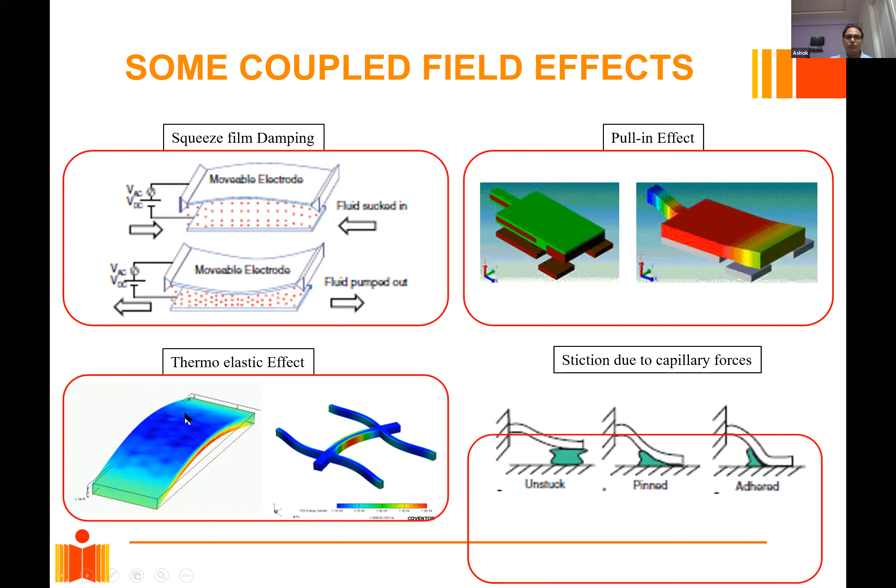Okay, so how do you model them? Modeling is a challenge. You have to go through the elasticity equation, the beam equation. The Euler beam equation is one of the simplest forms of this elasticity equation. Then the electrostatic equation, like Maxwell, and you will have to solve them together so that you can see the electromechanical

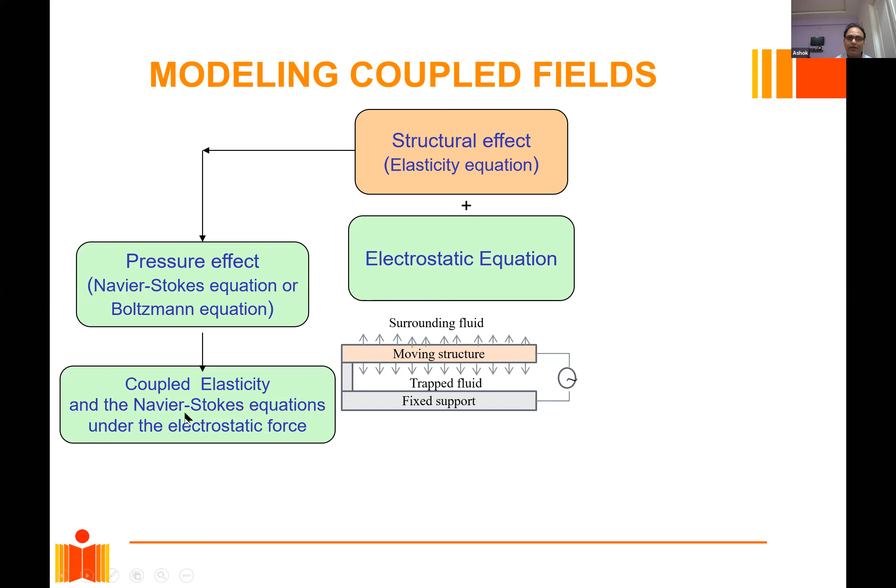effect, right? And then if you want to find out the damping effect, you have to again solve the Navier-Stokes or Boltzmann equation. The Boltzmann equation is for rarefied flow, which is the micro flows, and Navier-Stokes is for continuum flow. So you will have to club it again with the structural elasticity equation. Similarly, for temperature you will have to couple it with the energy equation and then solve it. So this will be a thermoelastic equation, a coupled equation.

So here you can see that there are two different approaches for MEMS design. First, you solve coupled equations using different techniques such as FEM, BEM, FDM. Then you extract lumped parameters associated with different fields and solve the corresponding equations to get the quantities. So out of all this coupling, what do you really need?

M effective, K effective, C effective to find omega, because omega is the square root of K effective by M effective. And the quality factor is 1 by 2 times the damping ratio, and the damping ratio is C by 2 root Km. So if you are able to find C, K, m out of all the physics, you simply have to see how it is going to affect your performance parameters based on the resonance. This is the key in MEMS design. Every coupling, everything, you need to deal with that particular set.

Okay, so how much time do I have? Sir, actually, we have planned the session for 1 hour and another half an hour for queries. Okay, so shall I stop here? As you wish, sir. If you want me to talk more, I can talk more, but here I can stop logically. Otherwise I'll go into different modes. Okay, sir. That was a mind-blowing session, probably an eye-opener for many who are attending. We have questions waiting for you, so you can have some water. No problem. Shall I start, sir?

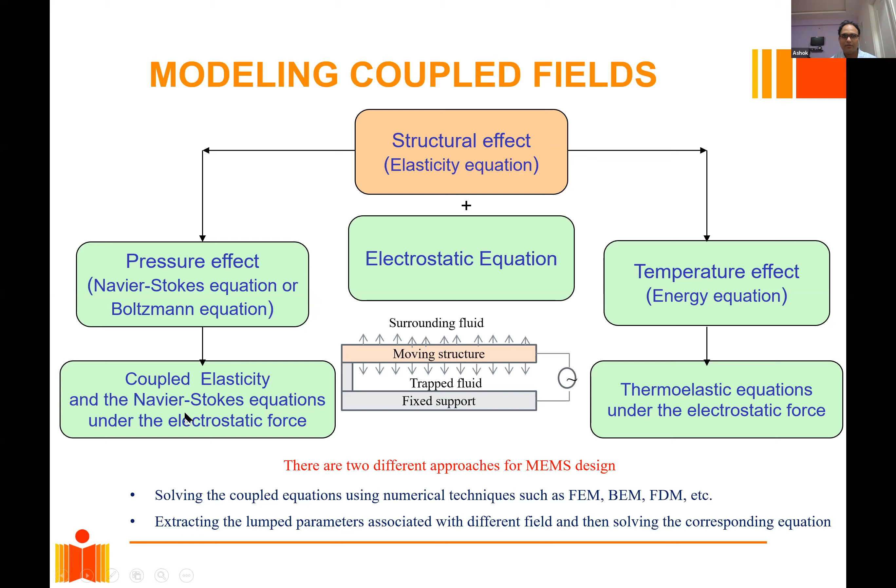Yes. Can you please share the current research topics in MEMS sensors? One current research topic in MEMS sensors is terahertz metamaterials. The second one is MEMS devices like MEMS gyroscopes based on ring type and disc type sensors, which are becoming popular now to improve accuracy. The third one is array based; unless you put them into arrays with flexible electronics, it is not really going to make sense for bigger structures.

So flexible electronics based on MEMS is another area, and optomechanics and optoelectronics, which is again key to utilizing IoT, because IoT involves many sensors, and unless these sensors can be processed at a faster rate, it doesn't really make sense. So we look for optoelectronics based devices where an optomechanical cavity is formed, and this also utilizes MEMS. These are very broad areas in focus currently, and people are trying to explore them.

Hello, sir. Yeah, hello. Sir, actually, I would like to know if it is really possible to design a conductivity sensor in COMSOL along with a second sensor, like dissolved oxygen. We are doing a final year project with conductivity and dissolved oxygen, so we want to do this as a single MEMS system. So is it really possible to simulate it in COMSOL?

So it's like you are saying it is a coupled chemical and electrical module, right? Yes, sir. COMSOL is quite good at doing this multi-physics coupling analysis. So as far as I know, I think you should be able to do it, because it has a very good battery-related module where all this chemical as well as thermal and structure-related analysis can be done quite easily. So yes, you can do it in COMSOL.